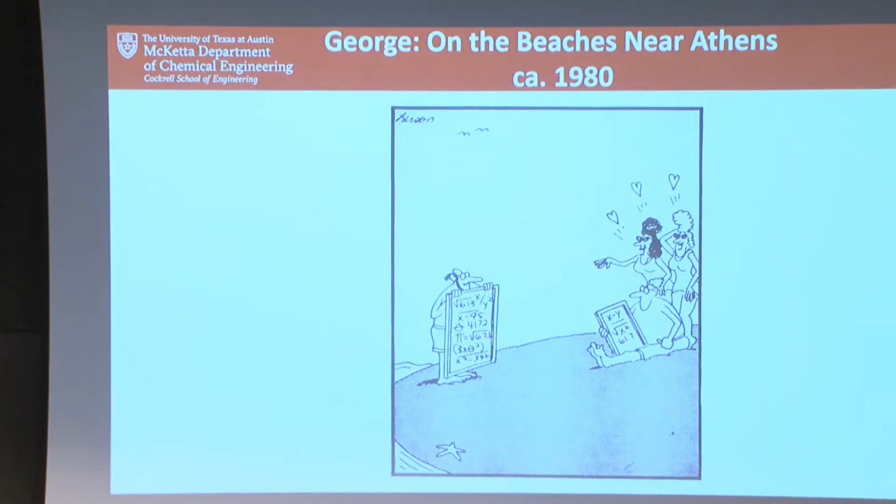We had a good time, and I think this first slide reflects a little bit about George's situation at that time — this is George out on the beaches near Athens. You heard the story from Manfred yesterday about him being very good at having women interested in him. This was George's first attempt, before he met Eleni, at trying to get to know women in Athens. And of course, he had the higher mathematics working in his favor at that point.

We heard some discussion about the process control book George worked on while in Athens. Being now in a kind of competitor position in terms of process control textbooks — although George did one edition, we're up to four now in our book, with Seborg, Mellichamp, and Frank Doyle. So we've stayed with it longer.

We actually started in 1981, believe it or not, with a short course in Santa Barbara, which I thought was a good place to have a short course — I think most of you would agree. We developed some notes, and then George's book came out, so we said, okay, maybe we should wait a while, let this one die out, and then bring ours to market. That was a little bit of the thinking back then, and that's how it played out.

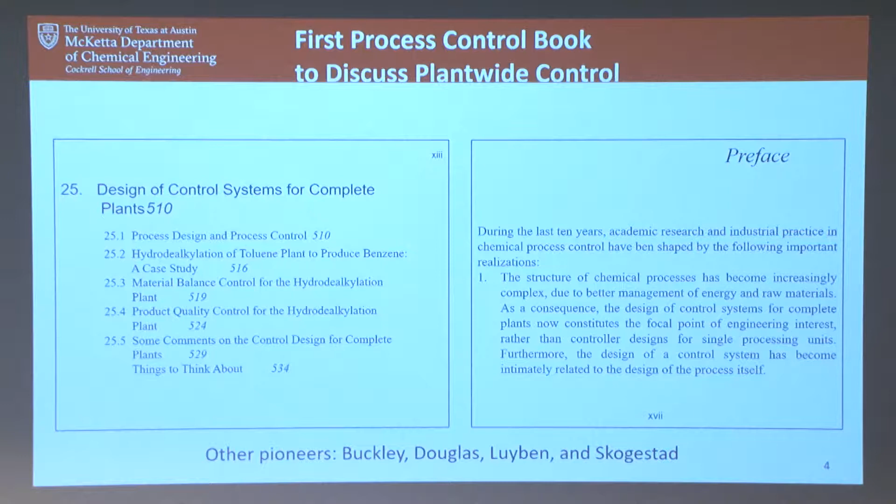What I want to do is recognize George — there was a discussion yesterday about his thinking on plant-wide control. This was the first mainstream process control book to talk about plant-wide control. I've excerpted a couple of pieces here — you can see a key paragraph in the preface that hits the tone of what George was trying to accomplish, very much deep thinking about how we think about plants and their control as opposed to individual unit operations. This is just one of the chapters.

Since that time, and even parallel to it, a number of other people — I've listed their names here — have been pioneers in plant-wide control. But George was certainly among them in terms of getting people to start thinking about this idea. I'm going to come back to that theme later in my talk today to talk about enterprise control.

Here's a slide I actually remembered because I got it from George — I don't know if you remember this slide, but at that time it was handwritten, not your edited version. You gave a talk around 2000 and said, okay, here's the way we need to think about the enterprise of process control. I still have a stash of 35 millimeter slides I used at various talks, and I remember giving a talk around 2000 where I converted your handwritten slide to this one.

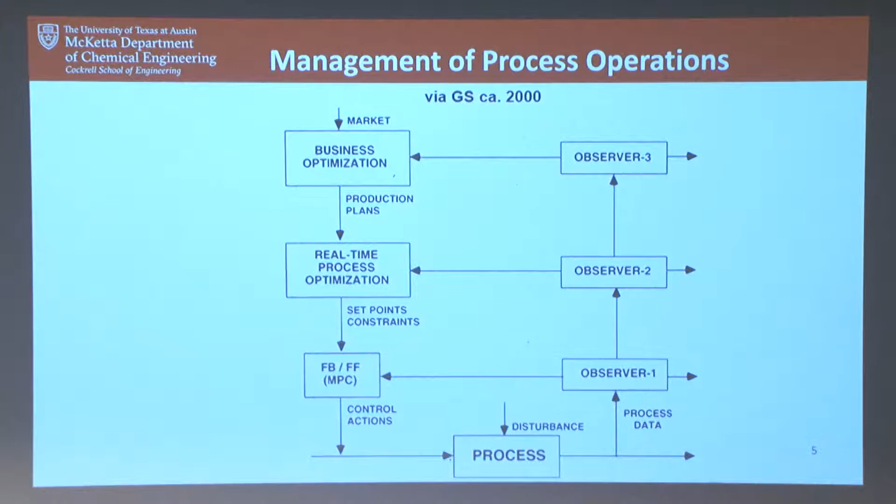But today we've developed our thinking further, and instead of a 3-layer kind of model, this is now a 5-layer model, which most people tend to use to talk about process control, optimization, and supply chain. Many people in this room work at different parts of this, but maybe just 2 of the blocks, or maybe 1.

But the point is that we still like to think about what's happening. And there is, of course, a timescale issue when you look at this slide about things you try to do that are essentially in the same realm of the time constants of the process. And then there are things you can do that are longer range and so on.

This diagram didn't appear in our first or second edition, but in the third edition that came out in 2004. So it's not been around that long, but it's pretty much accepted now. Anyway, this is where we end up thinking about all the different levels of process control.

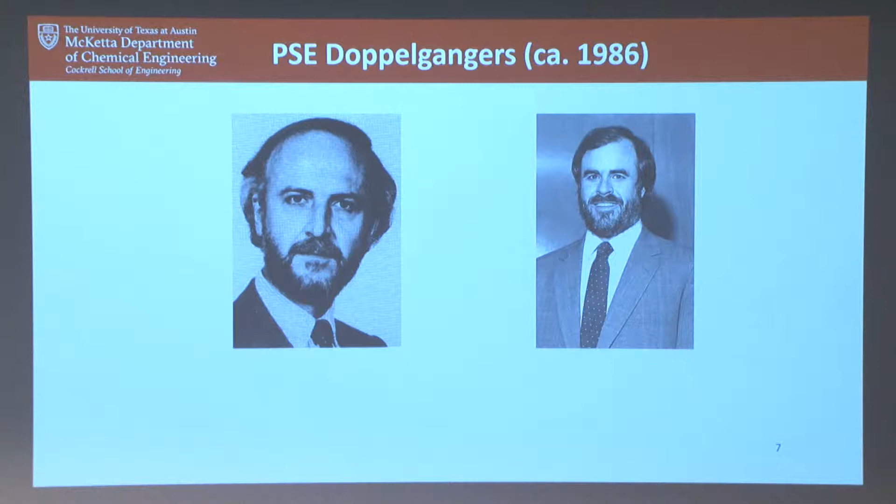And this is what George and I looked like around 1986. So you see there's some similarities, at least in terms of facial hair, if nothing else. And in terms of the hair on the head, we're very similar today too, right? So we all get older, right?

And in fact, I was thinking that, what's the difference between intelligent manufacturing or intelligent systems and smart manufacturing? Is there a difference? Well, probably not. But in any event, the words keep changing, but they seem to mean the same thing.

But certainly, this idea, the multi-layer artificial neural network, that caught fire in the late 70s and in the early 1980s, and people were trying to figure out how do we use this in the process industries, and that led to expert systems.

So we kind of have this going on with artificial intelligence and neural nets, machine learning, et cetera. It's happening today. And in fact, just a few weeks ago, Bill Gates was giving a graduation speech at Columbia, and he said, okay, AI, energy, and biotech are the three big deals coming. And whether we should believe him or not, I think he's probably not too far off on that.

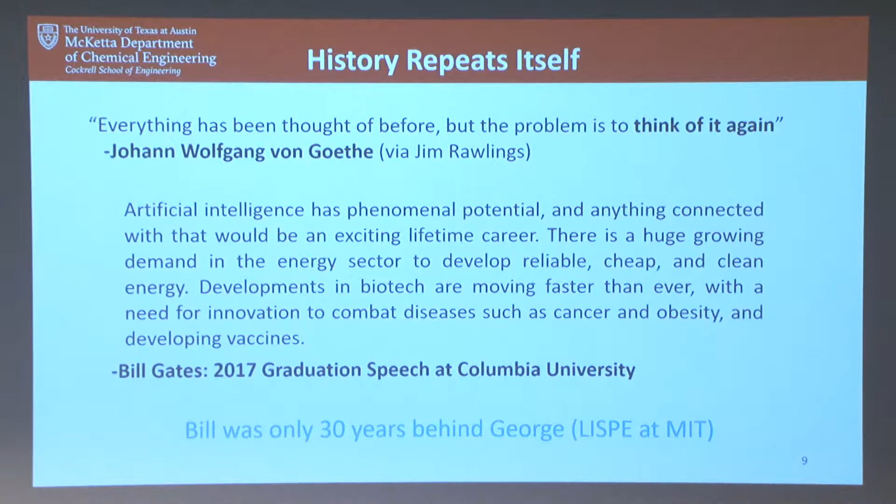So this is very interesting, but of course now we know that Bill was only 30 years behind George, because George was doing the Laboratory for Intelligent Systems back in 1986. So in any event, history does repeat itself, and George is probably getting out of being so active in this area, he's going to watch and see what happens here, I think, but I'm sure you'll be giving us advice on what we should be doing too.

Now, back at that time, there was also a lot of interest in expert systems, and of course, most of the ideas were around essentially the software required to do that. But there was also another school of thought then that really it's not about the software; it's about really having experts. And I'll show you a few of these jokes or cartoons from the CPC meetings that I've had a lot to do with.

So this is the one that came out in 1986 or so, the Shinskey in a box, okay? So does anyone remember who did this cartoon? Because I know who did it. Anyone guess? No. Is Eric here?

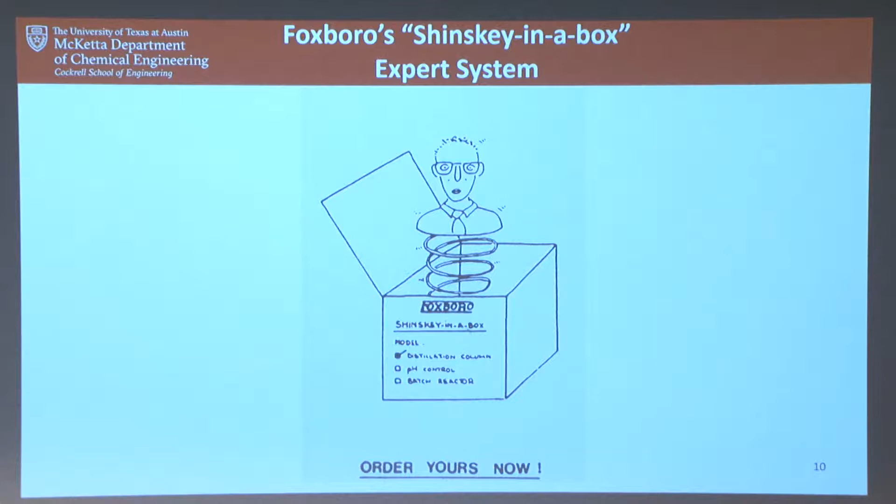And of course, this was also another funny thing that happened in one of the CPC meetings. We had a series of people, of course, people know about dynamic matrix control, or DMC. Later, we had someone give a talk at the next CPC where they got confused. They called it dynamic maintenance control instead of matrix control.

And then in CPC 5, we had someone from Shell who talked about how he got the Pooper Scooper Award. So he said, even a dog can control Shell's Deer Park refinery. So all you need, see, is the operator's there to feed the dog, and the dog is there to keep the operator away from the controls, okay?

That's not my first Trump joke. That's not my only Trump joke.

George has also received a number of awards, and some of them line up fairly well with comments made last night and yesterday. In 1991, George received the Extended Horizon Award at CPC4, for asking the longest question at CPC and sometimes providing long answers as well, but no acceptance speech was permitted.

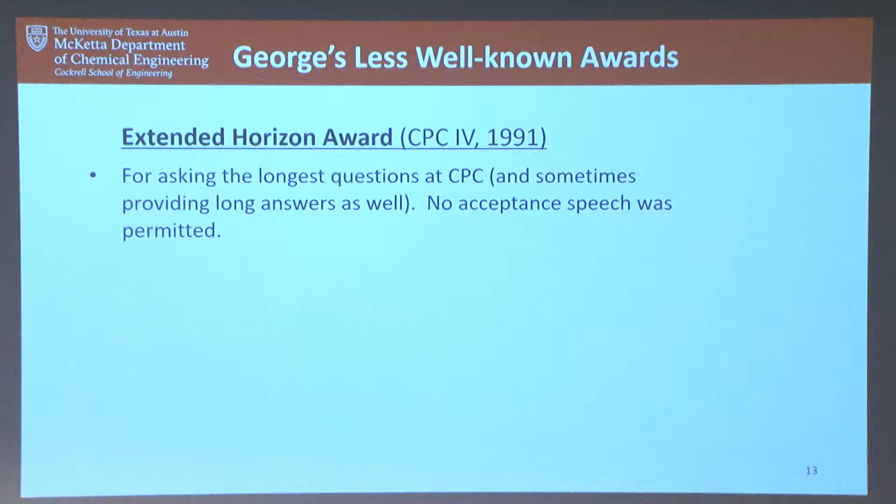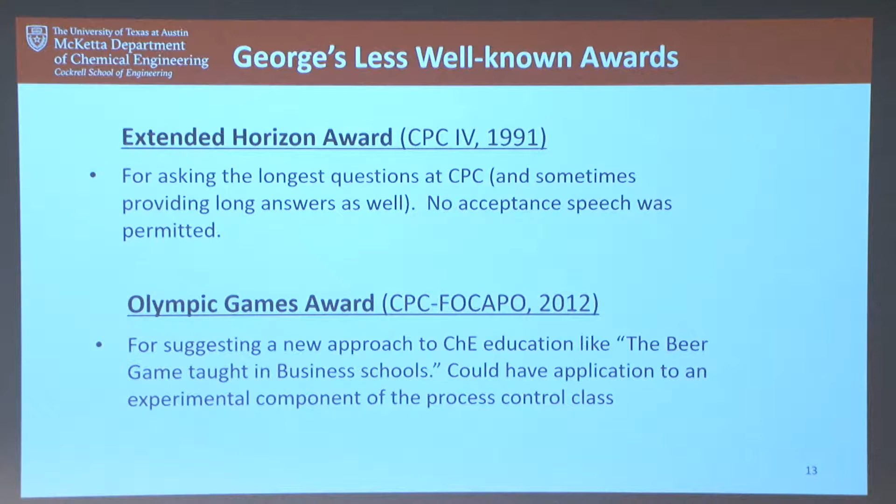That one resonated, obviously. And then more recently in 2012, he gave a nice talk about how we teach process control, and got the Olympic Games Award for suggesting a new approach to chemical engineering education, like the beer game taught in business schools, which he was quite familiar with here at the Sloan School. So those are two less well-known awards George has received.

So now let me transition a little bit into manufacturing more directly. Some of this does fit in because it's part of the things we try to do, such as data analytics. I'm pleased that Jim Davis is here at the meeting today.

Jim worked with George quite a bit on artificial intelligence and expert systems back in the 1980s. Then Jim and I got together probably 10 or 12 years ago when we started trying to address a grand challenge, identified by the National Science Foundation as one of 5 grand challenges about 10 or 12 years ago, which was manufacturing, or smart manufacturing, or intelligent manufacturing.

Of course, the whole thing there is based on data. This is one definition we can use for smart manufacturing: the right data at the right time in the right form, wherever needed. Notice the word enterprise is there. So smart manufacturing is, in a sense, from the very beginning, trying to adopt an enterprise point of view.

Of course, you'll have some talks at this meeting on Internet of Things. My example of why Internet of Things isn't the solution, or at least not the whole solution, is the following.

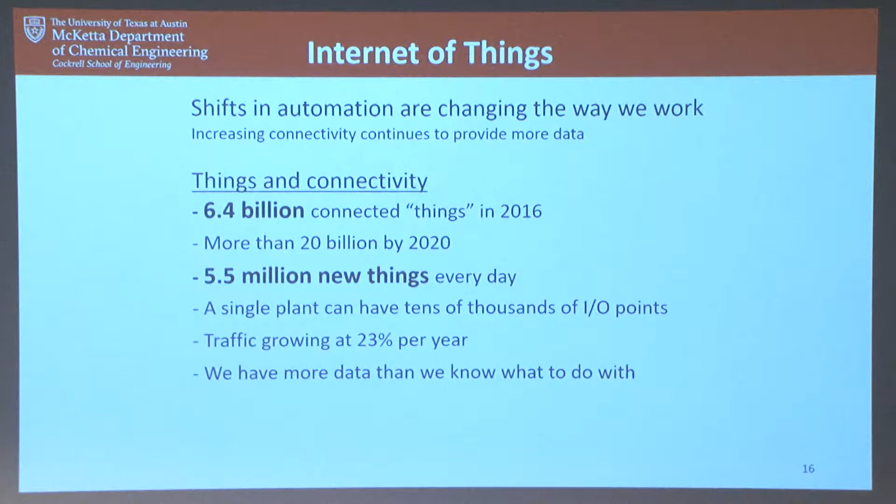The point is this is something that's out there, and it's interesting that as we track graduates in the area of process control, more and more of them are going to work for companies like Microsoft and Amazon, as well as startups and so on. So it's not too far-fetched that process systems control is going to be a unifying feature of all this.

Jim Davis and I actually started an organization about 6 years ago called SMLC, which stands for Smart Manufacturing Leadership Coalition. This is like a vision slide of all the things you'd like to try to accomplish.

Again, nothing here is really brand new to most of you in the audience. But it's looking not only at what's going on inside the factory, but also worrying about the supply chain and the customer side of it. You've got multiple objectives around doing things safely, sustainably, trying to do things in an energy efficient way, reducing emissions, and of course the thing that makes it all work is having access to excellent models, but also strong optimization capabilities.

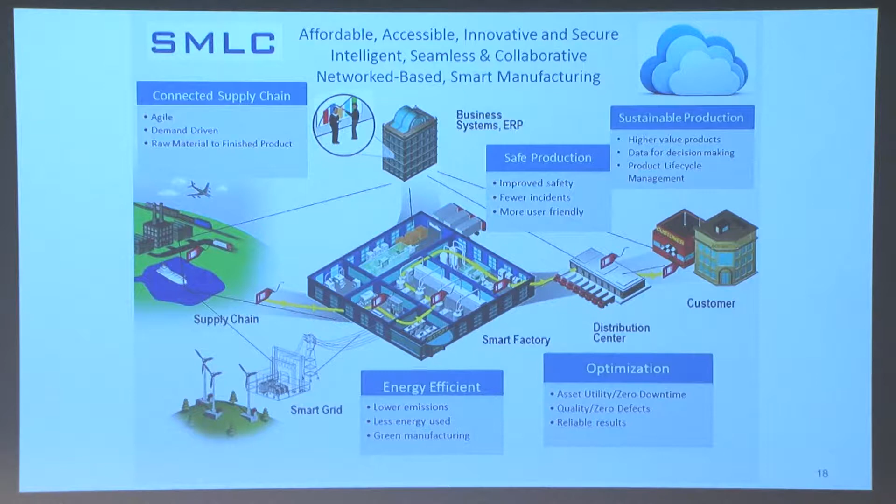I suppose all the work that Jim and I did in getting companies together, universities together, and trying to talk about how do we develop a national agenda around smart manufacturing. There was actually a major project that got funded by DOE that I ended up being the principal investigator for. I'll talk a little about some of the specifics of that in a minute.

The point is that basically provided a launch pad to write a major proposal to the U.S. Department of Energy when they said they wanted to establish a Smart Manufacturing Innovation Institute. And so this is what happened, this thing called CESMII. The CE there stands for Clean Energy, so it's the Clean Energy Smart Manufacturing Innovation Institute. It was announced roughly a little over a year ago, and it was finalized or formalized in January.

Of course, there's still some uncertainty now around what's happening as DOE gets reconfigured under the Trump administration. But the idea is it's a $70 million over 5 years investment by the government, and it's supposed to be matched at least 1-to-1. This is part of the series of manufacturing institutes that have been established across the country, supported by a variety of government agencies.

This was, in fact, the 9th one. There's also another one that's been formed, the 10th one, that also has a lot of interest for chemical engineers. It's called RAPID, that AIChE is leading, that has just also launched this year on process intensification. Some of you are also, I know, aware of that one as well.

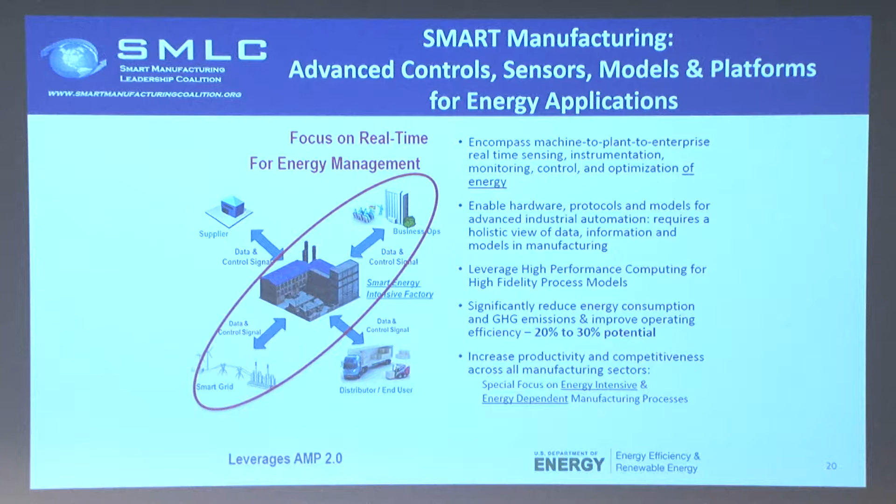So when you look at the stock DOE slide, when they were going around saying this is something they wanted to do, it's interesting that, first of all, I think Jim and I figured out that they read a lot of the literature we wrote, so they basically were able to transport that into a nice slide that talked about why you'd want to do all this. But the point is that if you read the different bullets here, you see process systems engineering embedded in everything here, and it's around sensors, modeling, control, optimization.

But this, again, is specifically addressing energy. The good news is that DOE, I think, also takes the attitude that it's not only energy but also quality. You've got to worry about the trade-off between those things, because if you operate a plant just to save energy, you can have poor quality products, and that doesn't end up becoming a viable business.

So let me talk about a couple of test beds that I worked on, along with Jim Davis and Michael Baldea, who's also a professor at University of Texas. We looked at actually 2 industrial scale plants during the past 4 years as a way of demonstrating the value of smart manufacturing. This is not intended to say, oh, you guys haven't heard of this idea before - certainly the ideas are well known to people in this room - but at the same time, applying it on a really large scale gets industry interested.

So we actually picked one process. Some of you know Larry Megan from Praxair. He arranged to basically run a large test on a steam methane reformer in Port Arthur, Texas. You can see the diagram here of what it looks like - it's basically a facility, if you've never seen one, about the size of this building. So it's a good sized facility.

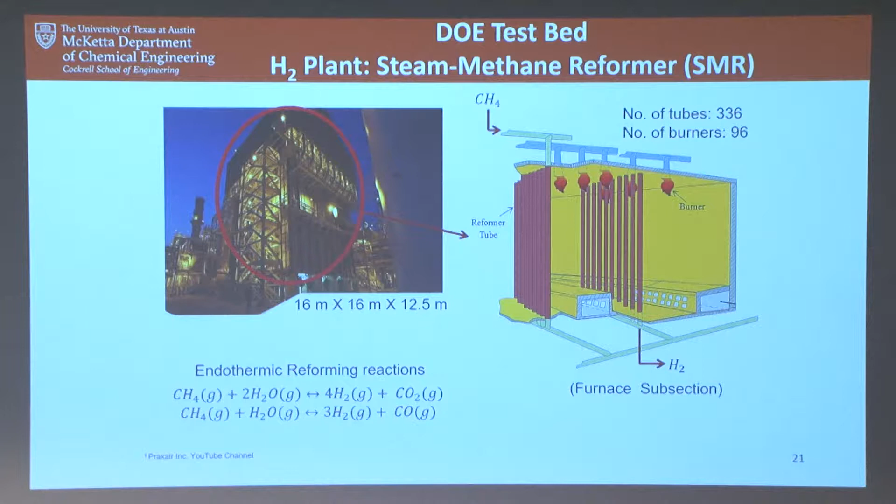The idea is that you've got catalyst tubes. You're heating up, essentially burning natural gas, in order to provide heat to drive an endothermic reaction so you can make hydrogen. In this case, you can see 336 tubes in this particular SMR, and they have burners that are, in the sense of the manipulated variables you have at your command, so you can vary the amount of natural gas going in order to essentially affect the heat transfer properties within the furnace. The idea, of course, is that you'd like to have every tube operate the same and produce the same molecules coming out, achieving maximum efficiency that way.

You do have to worry about the maximum temperature, because if you essentially have too many tubes that get to the maximum temperature, they're going to burn out, and then you have to shut down the unit and replace the tubes. So you'd like to be as near to the constraint as you can be, but then also narrow that distribution. That's, again, the goal of trying to balance the furnace.

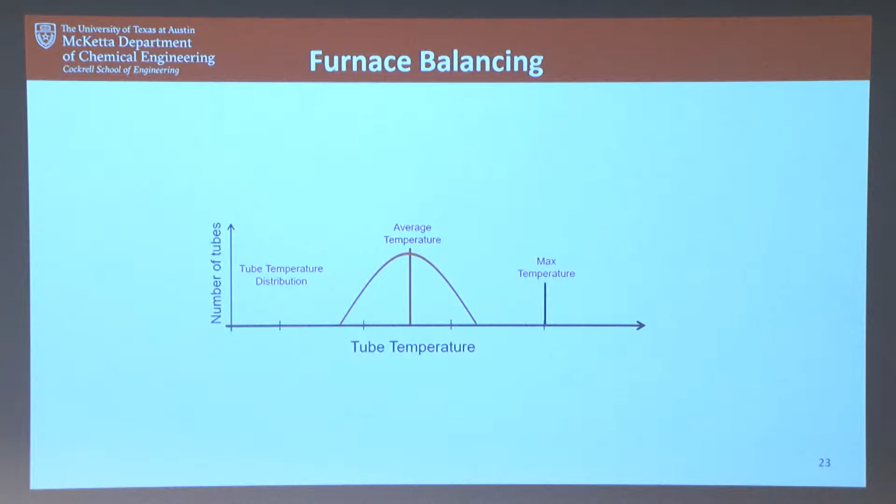You can see we can narrow the distribution, and then we can shift it over. That gives us a higher conversion of methane, and then lower energy consumption in terms of making hydrogen. So we've been able to demonstrate that we can reduce the amount of waste heat by about 25% in this unit, which was already fairly high efficiency, by the way, but you can still do some things in order to make it operate better.

It's interesting that a complex system like this really comes with no control valves. They just basically run it, and they go around and manually adjust things, but there's no automatic control.

So we have really collected a lot of information about temperatures. In fact, you can see that we had cameras mounted on the side of the wall, so you could actually go in and look at the temperature distribution. In fact, you can see, if we're looking at an IR map here of temperatures, it's changing all the time, okay, based on the data precision that we have.

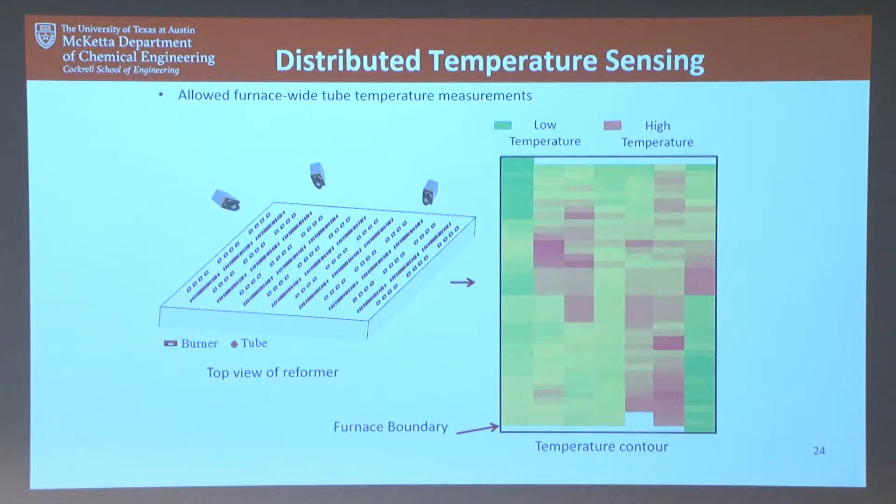And of course, you can go around and adjust the burners accordingly in order to essentially make the furnace operate more efficiently. But it's a big data problem. It's basically acquiring lots of information, and how do you reduce that?

Second example I wanted to briefly mention is metals processing, and this is one where you're essentially using a lot of energy in order to heat up metals, forge them, press them, treat them, and then you end up machining them in order to make a particular kind of shape.

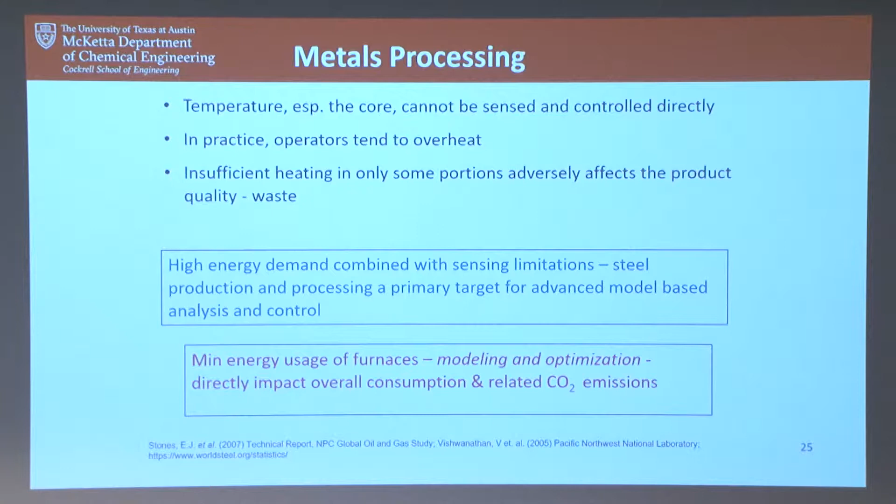And so we have found a second company that was willing to offer up a test bed, which was a company, General Dynamics in Scranton, Pennsylvania, that operates an Army ammunition plant. So they're making pretty good sized shells. You can see some of the pictures here.

Basically, the particular system I want to talk about in a little bit more detail is a heat treatment furnace where they carry out austenitization. You're basically putting these metal billets on a conveyor belt as it gets heated up. And so if you're trying to model this, you've got all the modes of heat transfer you're worried about, as well as essentially moving boundaries, and it's a set of PDEs that you have to solve.

And so it really offers the opportunity to do model-based control and model-based optimization. So here you see again what the final products look like. Those are about 18 inches tall, and you can see again what happens inside the furnace. It's under a nitrogen blanket.

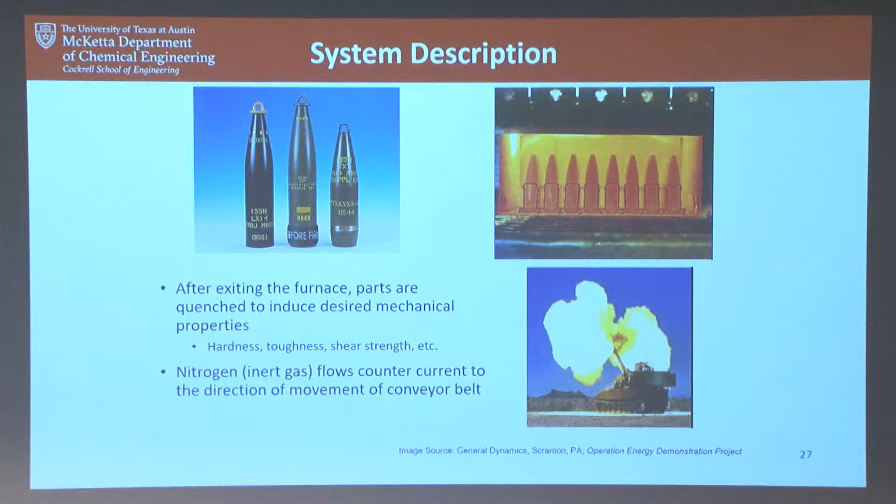The big challenge is, okay, how do I, first of all, operate this furnace at maximum efficiency and save energy? But then you also have to pay attention to the quality issue of, okay, what's the nature of the metal properties after I do the heat treatment, and what does the crystal structure look like, and so on.

Because if the crystal structure basically forms large grains, then you're going to have a lot of defects when you essentially get to the end of the line and do the machining. And in fact, if you look at the cost of energy versus the cost of defects, the cost of defects is definitely a lot larger in this case.

So you basically need to be able to model the materials properties, which unfortunately are not super well known. And you can model, again, what happens as a function of time with a part going through as it gets heated up, what the temperature distribution looks like as it moves through the furnace.

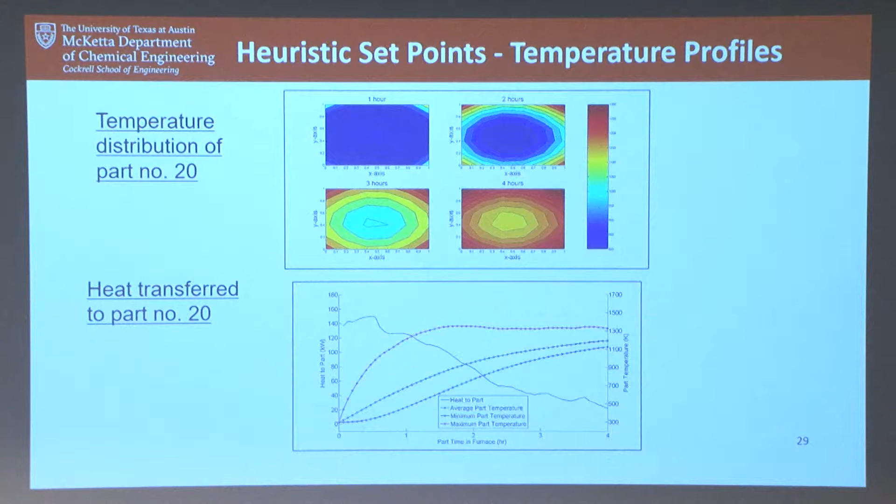I'm not going to talk about the graph in much detail. You can formulate a nonlinear programming problem in order to say, okay, I want to have the right things happening, minimize energy usage, subject to certain constraints on temperature. But then if you look down here about the temperature uniformity, that would be the temperature spread constraint.

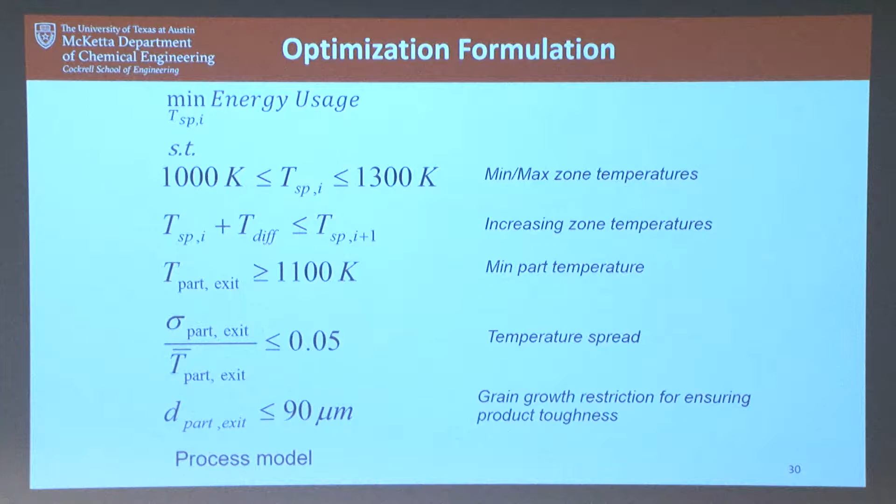And then finally, if you have this embedded in a materials model, you can then essentially put some restrictions on grain growth so that you actually make sure that not only can you save energy, but also make the products that are essentially not going to be thrown away, but are in good shape.

So, a lot of talk around manufacturing and how we bring jobs back. There's really an excellent article I'd suggest people Google, by Atkinson and Ezell, that talks about all the aspects of this—it's a complex question, certainly oversimplified by the administration. But the point is those jobs have gone away, they're not coming back. And if we brought them back, we don't want people in this country making Happy Meal toys and other low cost production items.

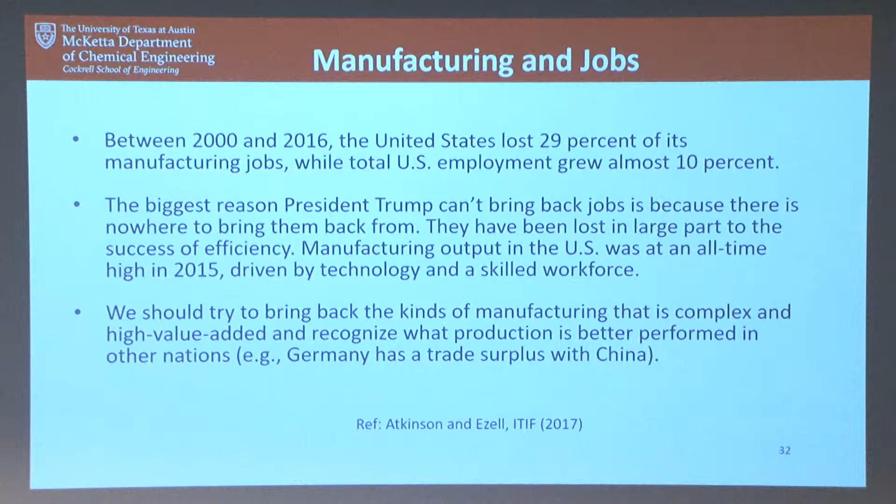This is where I think PSE comes into play. If the U.S. wants to be a leader in manufacturing and increase the job base, we have to identify jobs that are essentially high value added. Some things may be performed better or cheaper in other countries, but we should identify industries that are maturing and require a high level of intelligence to make the products. One example cited is that Germany has a trade surplus with China—so it's not that it can't be done.

Let me talk now about manufacturing and the three components of smart manufacturing. In the context of PSE, it's basically this: factory enterprise integration, exploiting the intelligence of manufacturing, and having disruptive business models.

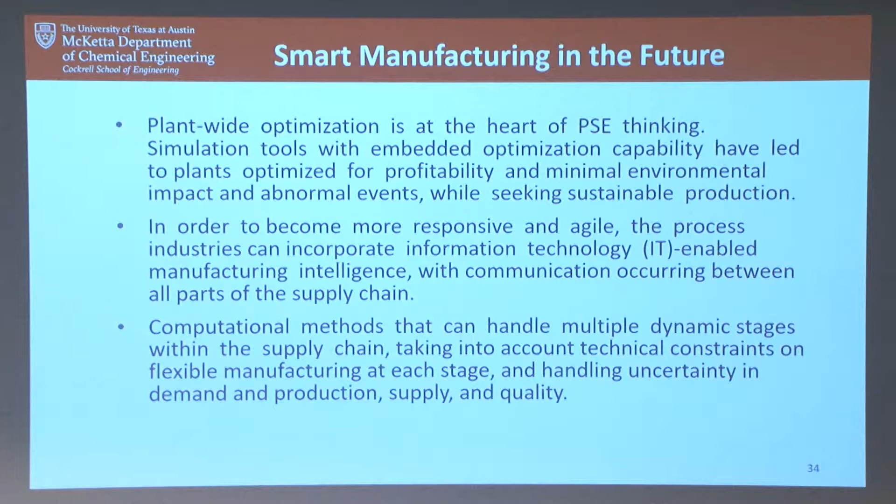As I showed in that diagram of the vision of smart manufacturing, we want to optimize for profitability but have minimal environmental impact and abnormal events. We want the process to become more agile. And finally, we need computational methods that can handle the supply chain and figure out how to do flexible manufacturing while dealing with uncertainty.

So models are really the key element of this. When we're trying to do control, a model helps us figure out what's going to happen down the road in terms of system performance. What's really changing in manufacturing is that we used to make molecules like methanol, ethylene, and things like that. Now we're going to focus more on polymer blends, solvent mixtures, metal composites like I talked about, electrolytes, and so on. That's going to put a lot more burden on the modeling people, and characterizing the whole supply chain from a molecular level is important.

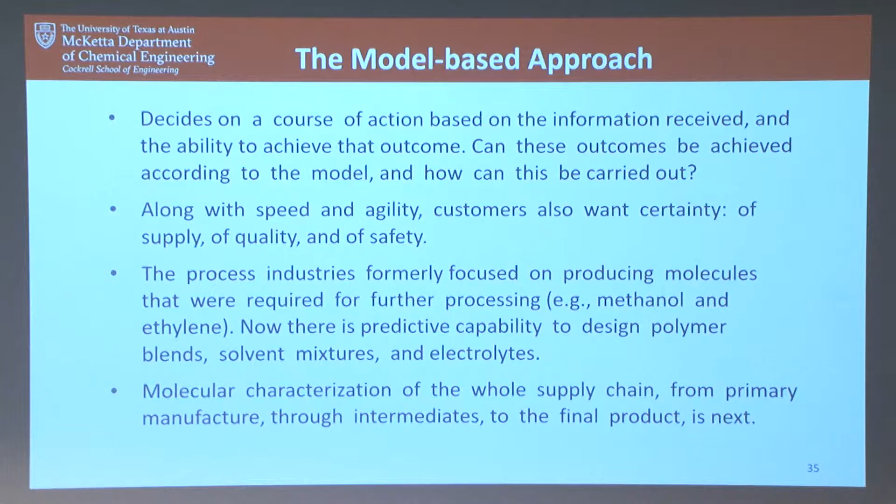So let me wrap up here. We've got to have improved accuracy of models, especially for some of these new kinds of products. I think we're going to see a lot more high-performance computing, but mathematics is still going to be a key element of PSE. The other problem is who's going to take care of the models—where are those people going to come from? It's not something you just hand over without people who know how to take care of them.

In conclusion, I think the smart manufacturing paradigm aligns with PSE, and bringing in PSE and ICT—information and communications technology—is going to help us be more broadly applicable, not only to large enterprises that we know about, but also small and medium ones.

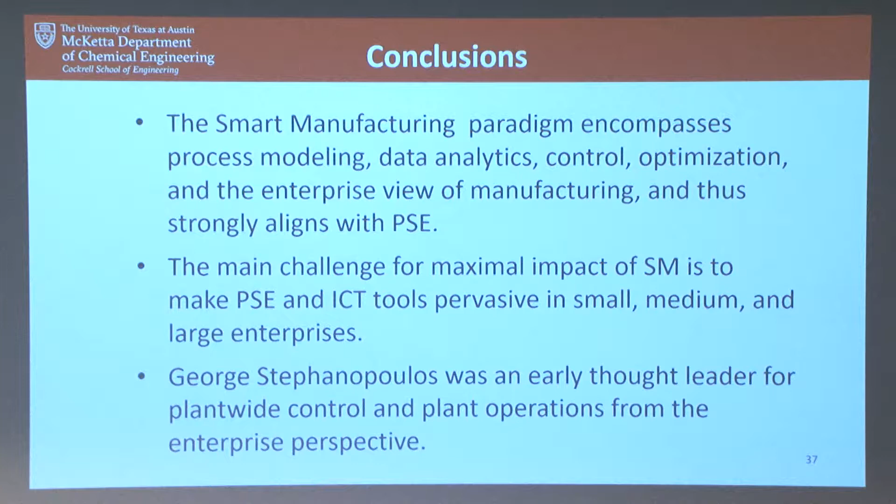There was a conference in Germany last year that I attended, and they had invited three politicians. I was impressed by how much the politicians were informed about technology. One particular thing was that the guy said, you academics, in five years you're not going to be able to do any research without having a data technician or data curator in your group. Where are these people coming from? What degrees do they have? They're obviously not going to be Herr Professor doctors, but somebody has to make a career plan. How do we educate them? Where do we go? I was amazed because I realized it's true.

I was very much amazed because it seems their politicians think about technology and what we need, while here there's not very much discussion about it. You said who is going to take care of the models, who is going to take care of the data. What are these people going to be, and is NSF ever going to fund them?

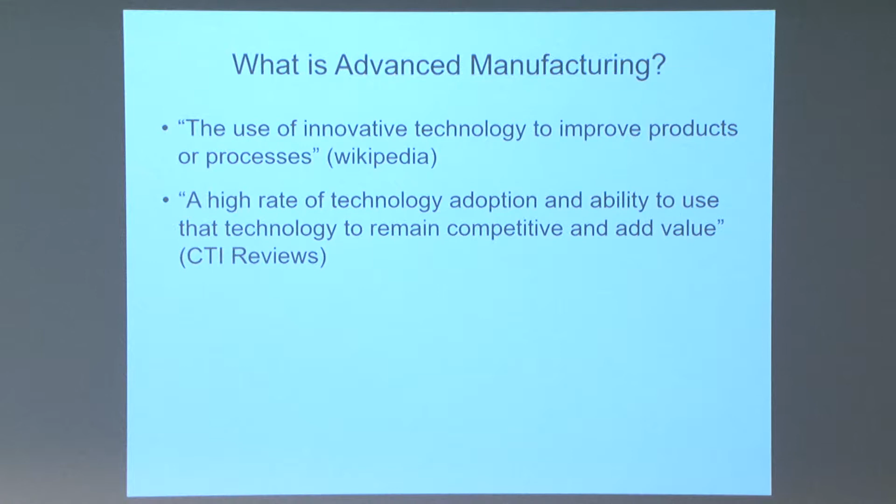So what is it? Here's some definitions - of course, the first place you go for anything is Wikipedia nowadays. The use of innovative technology to improve products and processes, a high rate of technology adoption and ability to use that technology to remain competitive and add value. And then the White House report in 2014: manufacturing that entails rapid transfer of science and technology into manufactured products and processes.

So I think these definitions are fine, but when I use the definition in my own group, I focus more on something that was referred to at the end of Tom's talk - really products in which there's a very high value added in the process. So typically in my group we focus a lot on, let's say, pharmaceuticals and biopharmaceuticals, where you've got carbon, hydrogen, oxygen, maybe a few nitrogen and phosphorus, and then tens or hundreds of millions of dollars come out the other end. So we tend to focus on those sorts of industries, and also where the products are very highly structured - they may have molecular structure, which of course is important, but also crystal structures and microstructure and so forth, which was something also alluded to in a different application in the previous talk.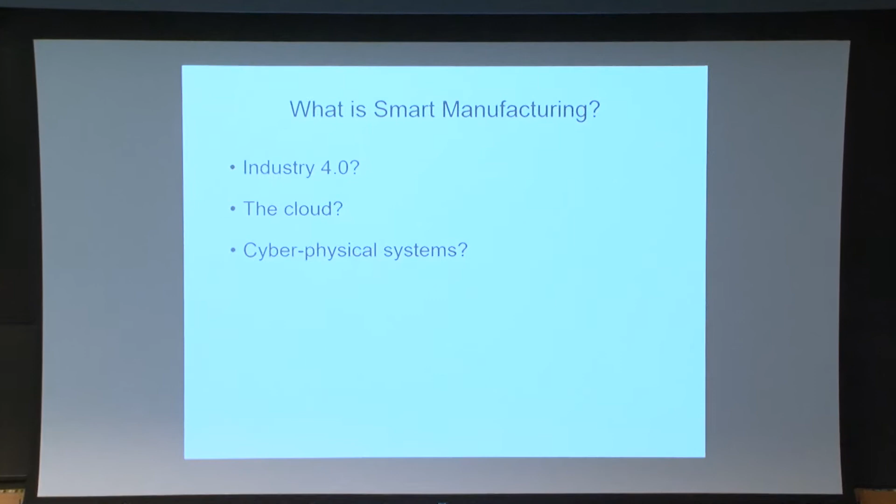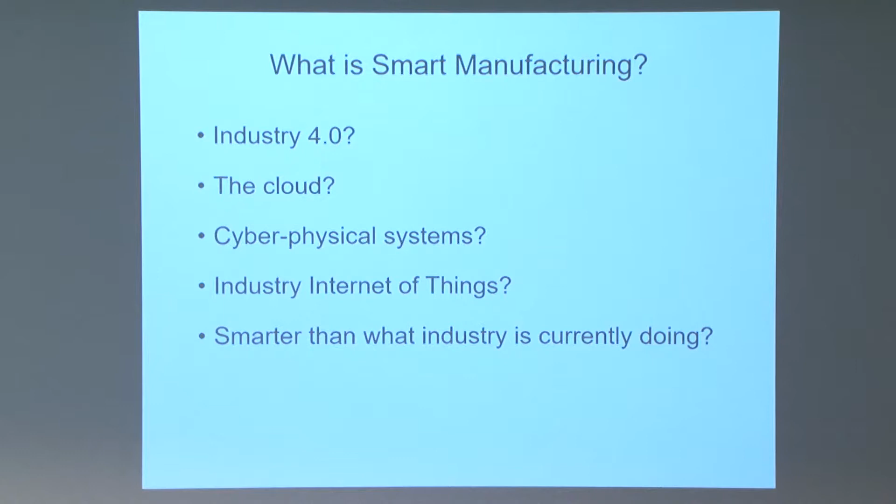Now, the previous talk was about smart manufacturing, so I knew that was probably going to be the topic before, so I'm not going to talk too much about this. But these were terms that were raised yesterday, and so those are all things about smart manufacturing. I like this one, which I heard at SMLC: somebody said smart manufacturing is smarter than what industry is currently doing. So those are the other ones you've all heard before.

So instead, I'm going to focus on a particular vision, at least how I see advanced manufacturing. Part of this is also to address the question that was the last question to Tom about how do you deal with workforce and how do you deal with user skills in terms of operators.

So this is a project, the second DARPA grant that we had. This particular thing here I actually pulled off the DARPA website, so it's all publicly available. DARPA's been funding quite a bit of research in chemical engineering and manufacturing.

This particular one's title happens to come from something that Klaus Jensen came up with here at MIT, which is automated systems for knowledge-based continuous organic synthesis. The text here is an edited version I condensed from the DARPA website that defines the general program that funds our system. What we're building is a fully automated chemical synthesizer that produces, purifies, characterizes, and scales a wide range of organic molecules.

The thing about this is we're trying to build something very similar to when you request things. The idea is you'd have a box, let's say the size of a refrigerator, and you'd walk up to it and say the name of some compound. Maybe you say aliskiren hemifumarate, as an example - that happens to be a drug compound. Then you'd say some catchphrase, so it knows you're not just saying the word in casual conversation. Like 'hook me up' - and then bam, it makes it.

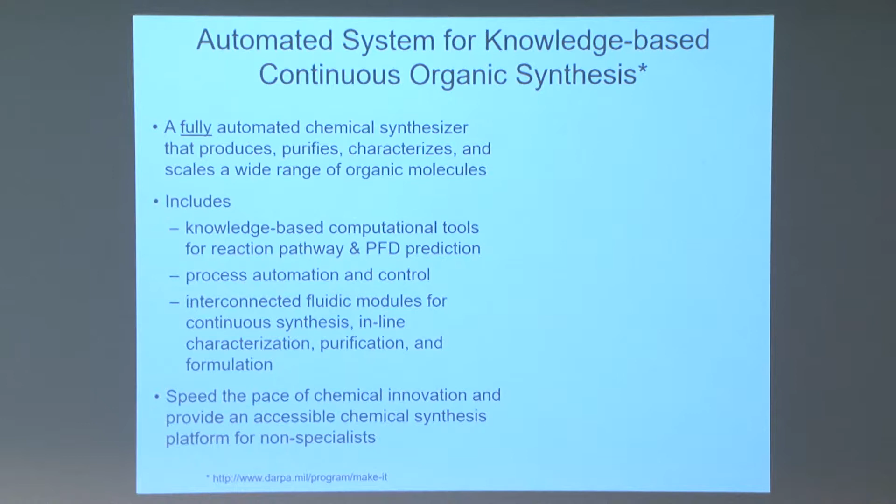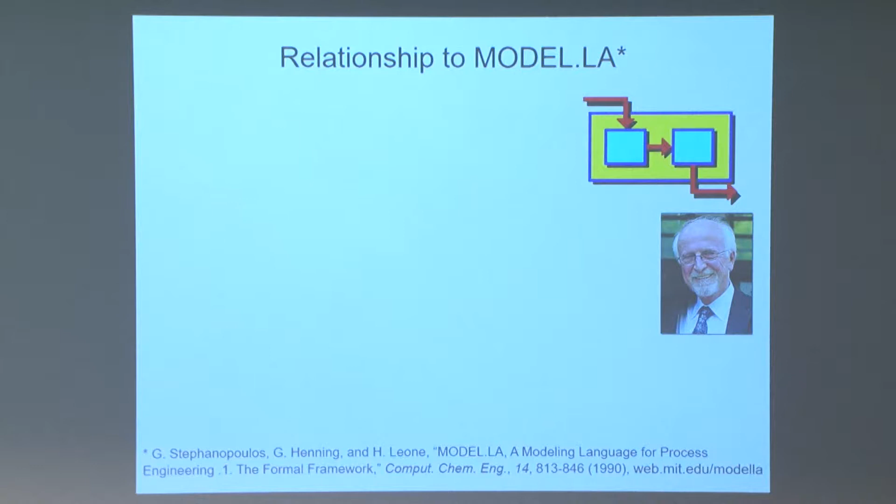So how does this relate to George? Now I'm going to George - I decided not to put George at the beginning, I put him on slide 3, because this integrates pretty well with what this is. Many of us hopefully are familiar with MODEL.LA, but for those who aren't, that's the symbol for MODEL.LA. This was one of the projects from George's lab that was also mentioned briefly yesterday - a computer-aided phenomena-based modeling laboratory that supports synthesis, modeling, and analysis activities in chemical engineering. You can see MODEL.LA is from modeling laboratory.

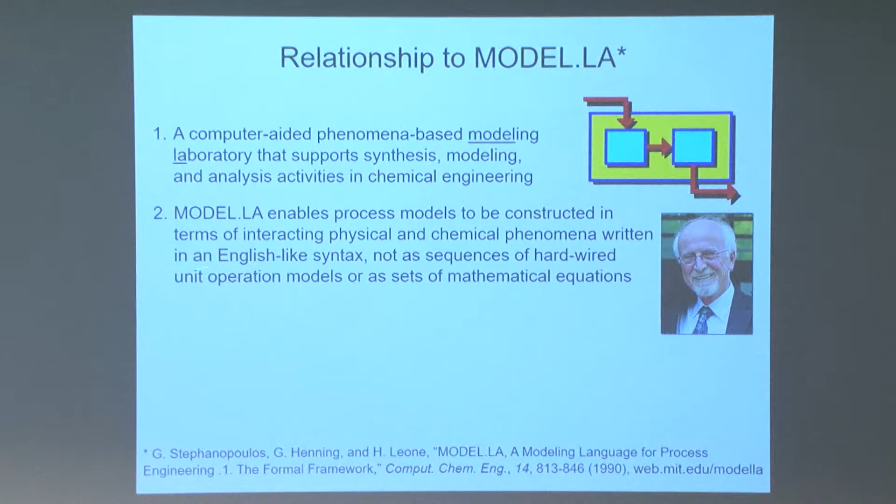MODEL.LA enables process models to be constructed in terms of interacting physical and chemical phenomena, written in English-like syntax, not as sequences of hardwired unit operations or sets of mathematical equations. Based on assumed phenomenon structure, the complete set of equations is derived. This was focused in part on making tools more accessible, and also more efficient.

So what I want to do is compare this to what I just talked about. This is actually the same, right? We're building systems where synthesis, modeling, and analysis are integrated, including uncertainty analysis and optimal control, et cetera. And the second part we're clearly doing too, since we're deriving first principles models for everything.

That's enabled because we're doing small modular units, so the flow patterns are simpler. I agree with that, but that's okay - if you don't like a control problem, you just define a new one by changing the process. So definitely as a team, that's also what we're doing.

And we're constructing all of the equations fully automated. In the system, the plant is put together with the data structures, and it just constructs dynamic simulations in an automated fashion. I'll talk more about that in a few slides. But what's really different is replacing step 2 from MODEL.LA, which is about constructing and interacting with English-like syntax. We're replacing all of this to make it fully automated - automatic construction of process flow diagrams.

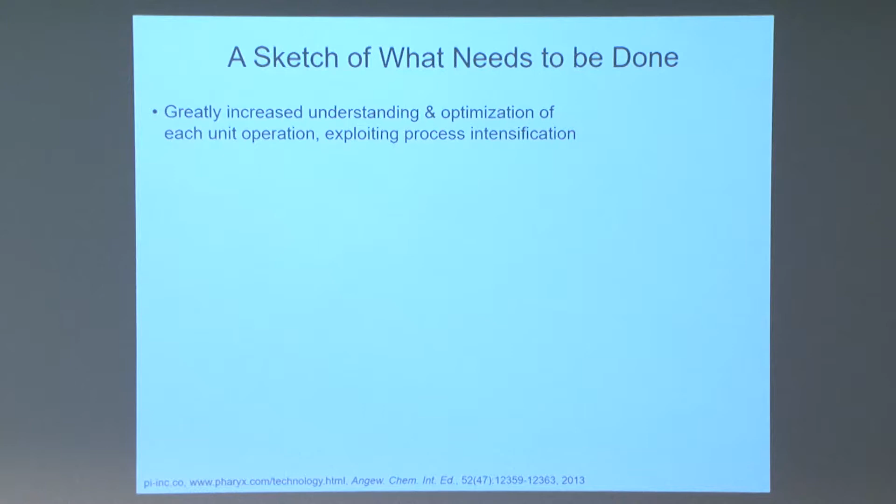First is increased understanding and optimization of each unit operation, exploiting process intensification. We're building and designing very intense processes in the team - high surface area to volume ratios, easy to control, high gains, fast dynamics, small time delays - things that make the control problem a lot easier. Process intensification has many benefits you've probably alluded to yesterday, including cost savings and efficiencies, and it also turns out it makes control problems easy as well.

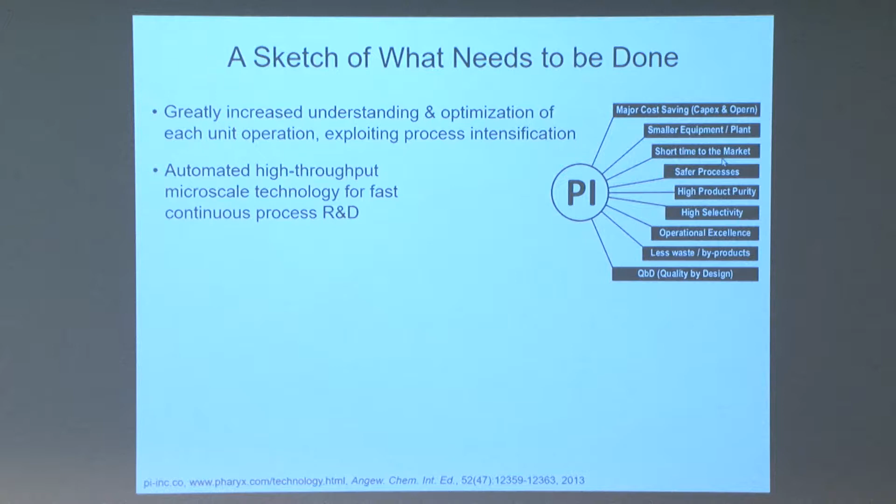So it makes automation of control a lot easier for this kind of system compared to, say, a refinery, where things aren't so intense and you have large time delays, slow time constants, and often low gains. Automated high throughput micro scale to maybe millimeter scale technology enables fast continuous process R&D. Hasebe talked yesterday about the advantage of continuous processing, and continuous is actually good at small scale too in terms of surface area to volume ratios and controllability and operations. I won't talk about that here.

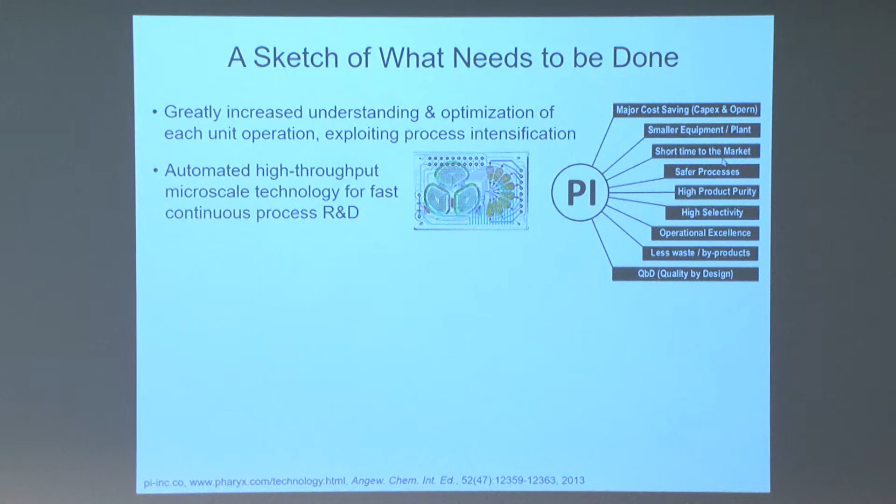This happens to be a picture of one of our collaborators' bioreactors done at micro scale. This system is about the size of a double-sized card deck, but it has very high densities. Plug and play modules - we're designing everything to be plug and play, so you just connect them together. Integrated control and monitoring equipment facilitates deployment, so people can use the modules without any background in control or operation. Again, this is made a lot easier because of doing things at the micro scale. For example, for reactor control, it becomes very easy when you have very high surface area to volume ratio.

You don't need models coming from upstream calculations - you don't even need models to know whether it's exothermic or endothermic. You can just take your whole reactor and put it in an oven, and control the oven at constant temperature. That's easy to do when surface area to volume ratios are very high. And then it's all plug and play, so you just connect the different pieces together with standard connectors - straightforward.

For the user, all the models are dynamic, and we need that because we're building models to do all the startup, shutdown, and transitions also completely automated. And that's really important. It's also important to model the disturbances and uncertainties, because that's the part that actually leads to reductions in control performance.

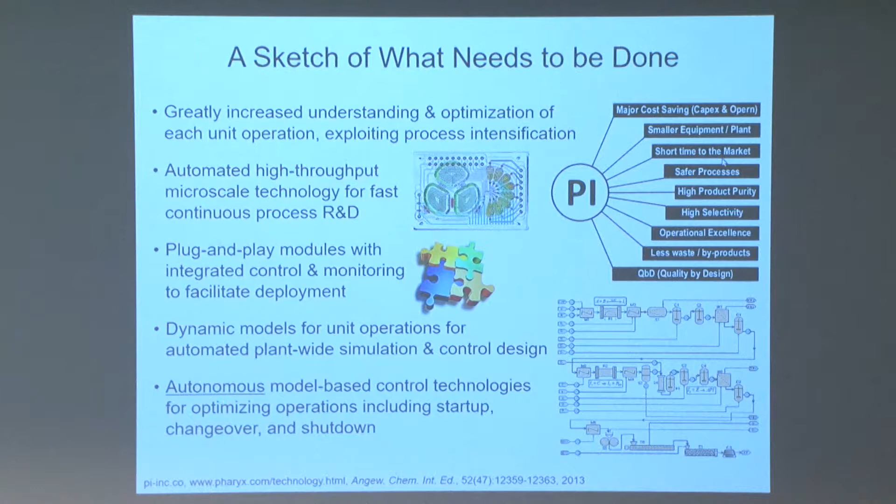That happens to be a previous plant that we built with a bunch of collaborators here at MIT. And then really autonomous. So how do you do autonomous model-based control technologies? This is sort of the components needed to realize a 2040 kind of vision of control.

Now I'm going to say some things that are probably well known to control engineers, but not to all of the audience, so I'll just say it briefly. What we're doing is building a virtual plant, a plant simulation, a dynamic simulation. And that simulation is very, very heavily first principles, essentially all first principles except for calibration of sensors.

And we're doing that because our MPC problems, our control problems, are very different than what you have in the oil industry. So let's take a little sidebar about the oil industry.

Typically you design an MPC controller, you already have all the regulatory controls in place, everything's running, and you're collecting lots of data. Then you do experiments, collect lots of data. Then you build models, typically step response models—actually first you do state space, usually converted to step response, but that's a detail. And then you tune your controller.

But what we're doing in this case is very different, in that we're having the control start from zero. This is a fully automated system. So instead of setting it up with a bunch of operators, we push a button and the full thing's automated.

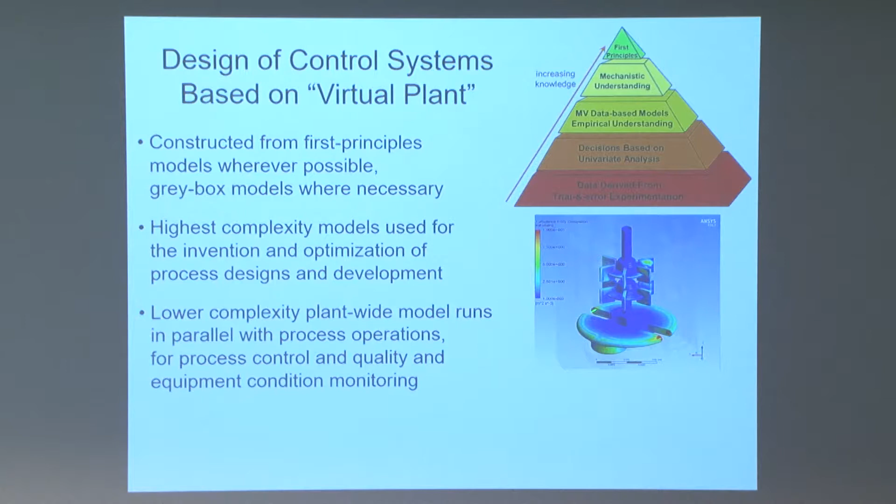That's really our goal here, but that's not the models we actually use when we feed into the control systems. What we do is use lower complexity models. After all this stuff has been designed well, we can use very simple type models—well-mixed tanks, a couple of tanks in series kind of models, for example.

Here's an example of one we use for one of our static mixers for process intensification—it's a standard tank-in-series kind of model. Those are what we need for control and operations, and that's actually the stuff we use when we compose our dynamic simulations for process control and monitoring.

And the goal for all of this is right first time. So the idea is when you start up the process, it's right first time and everything's on spec. Now, what's difficult is that there's a very different situation in pharmaceuticals, or for many high-value products, than what you'd have in the large chemical industry.

So if you have a refinery, let's say you have some gasoline, and the octane is just a little bit below what it should be—do you care? You might lose a little energy, but you put it in a gigantic tank, and if a lot of the other stuff is a little above octane, the overall average is okay, everything's fine.

That's very different when you're looking at high-value type products. High-value products very often have to be everything on spec. So let me give you an example: if you have bad tablets and good tablets and you mix them up, can you sell that? Well, you can't, right?

So actually, if you have one tablet bad anywhere, that entire lot has to go. That could be $10 to $20 million gone, right? Just for having one off-spec product. So you can't, in some sense, mix away your mistakes.

You really have to have everything right. When we design these systems for these automated plants, our focus is not speed to steady state or anything like that. It's actually making the product quality on spec right away so that there's no wasted product. So what else is available and what's needed really from a control perspective?

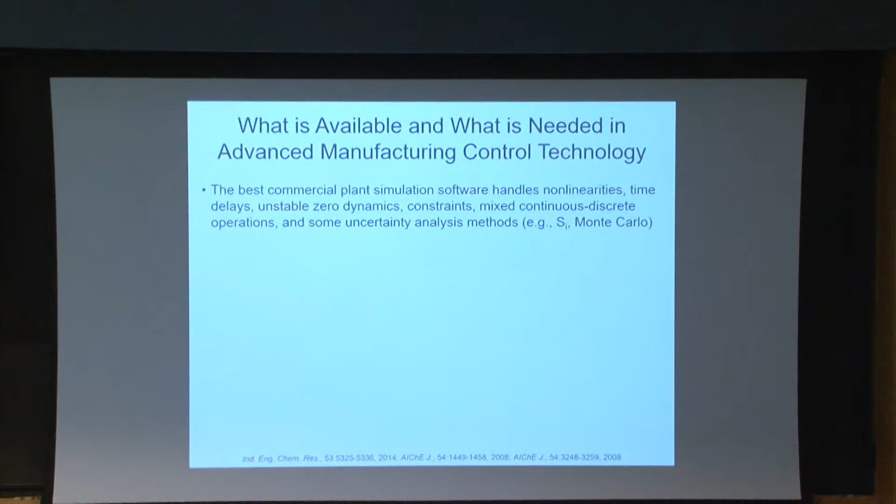One of the things that helps us is plant simulation software, and there was a talk about this just yesterday, talking about gPROMS basically. The best commercial plant simulation software is actually pretty powerful. If you compare the power with the best-in-class methods with what's available in most of industry, it's actually pretty powerful what they've been able to put together.

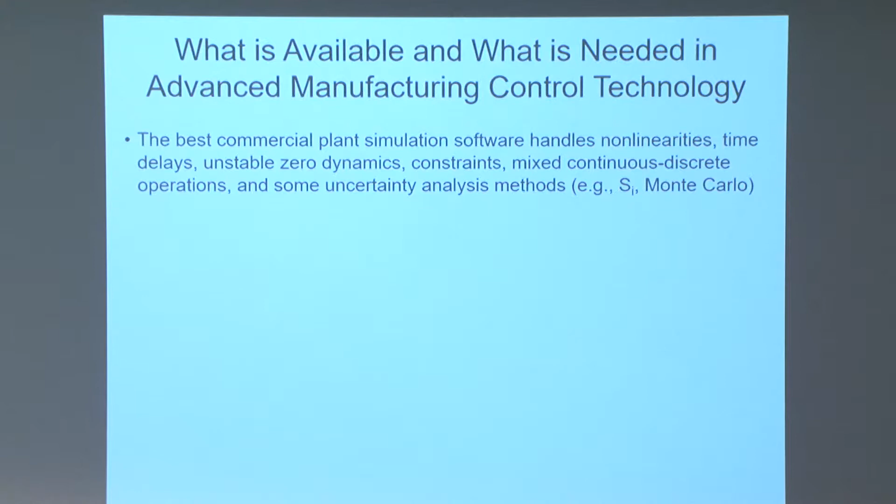You can already handle nonlinearities, time delays, unstable zero dynamics - that's just a technical term meaning non-minimum phase behavior. Constraints, mixed continuous discrete operations, and some uncertainty analysis methods such as sensitivity analysis and Monte Carlo simulations are just built in. That's stuff that's certainly been available, actually available for a while. There's a variety of vendors you can go to that have software with certain pros and cons, but all dynamic simulation with these kind of capabilities.

We tend to use more advanced uncertainty analysis tools usually that can either be integrated into the software, which makes it really fast, or you can have wraparound software. These involve techniques such as polynomial chaos expansions and such. These things can allow you to have much, much faster performance, especially if we're using those for feedback control.

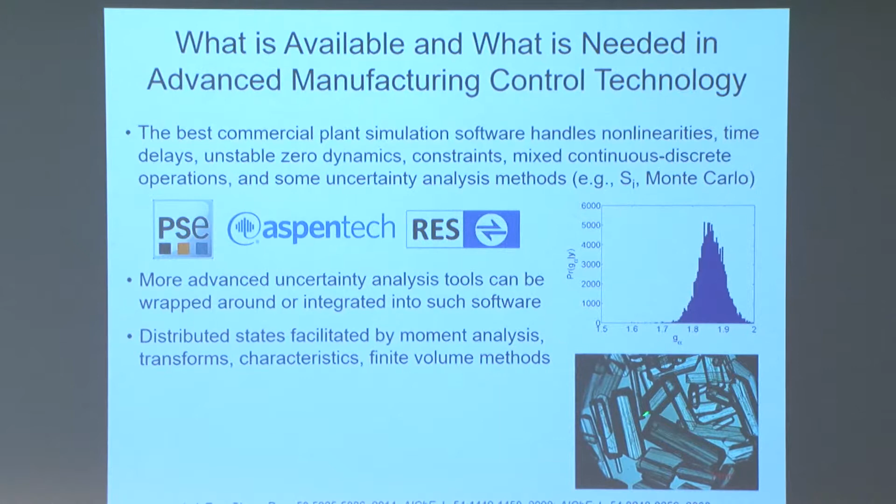But that's okay. The person who's doing this kind of stuff and building the components for the system, the software then moves with that component. So they stay together and they move together. When you can put all the plant together in an automated way, you can use the components without understanding what's actually in the simulation model for each of those modules. That's basically transparent - the user doesn't see that. It just needs one person to know this to build the modules to make that work. This just shows an example from our own lab of distributed states - roughly a two-dimensional distribution, like a two-dimensional size distribution in that case.

More research is really needed in automating the tuning process, so trying to make it so that it's not lots and lots of tuning. We've done a lot of work in that for the last several years, but I think more work needs to be done.

One of the things we've been doing is building it based on realistic uncertainty description you get from system ID that can be constructed automatically, so you can design your MPC controllers where you can just focus on performance.

If you look at the way you implement an MPC controller in practice, you get a step response matrix, and then you might get several of those, and you choose among them, then you go ahead and do a lot of iteration and tuning to try to tune things. But there's no uncertainty quantification, it doesn't show up. So a lot of the stuff you're tuning is just tuning things to deal with stuff that isn't quantified, and you're trading off between different uncertainties and performance. You end up getting a lot of tuning parameters doing it that way.

So in this way, what you do is have the uncertainty come in, and then you just optimize the performance, which is specified by dollars or whatever it is that has value. Then you can get rid of a lot of that tuning. At least that's what the supposition is.

We've worked a lot on reducing online computations. I think more work is still needed, but there are now MPC algorithms that do robust MPC that are almost as fast as, within the same kind of scale and order of magnitude as, nominal MPC algorithms.

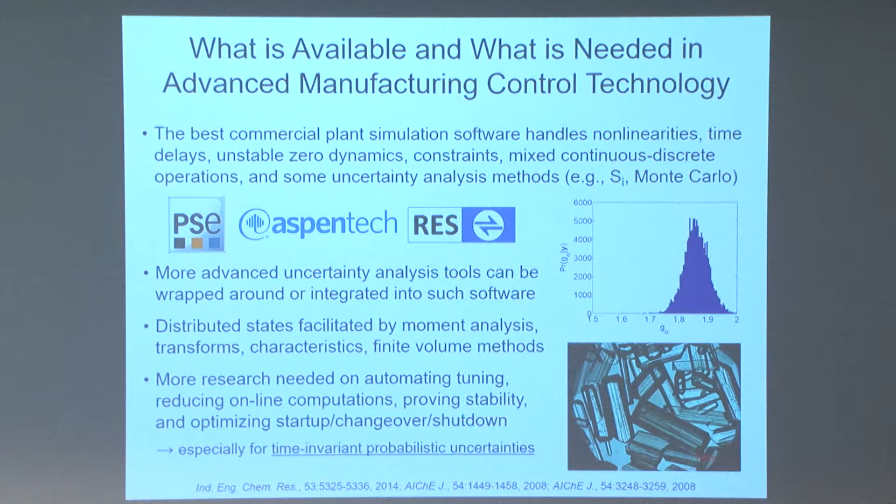What I mentioned before is that I think, or at least what we're doing and hoping, and we see more people doing, is to really do this time-invariant probabilistic uncertainty, or slowly time-varying probabilistic uncertainties, because that's a lot more realistic and information-rich than just doing uncertainty in the traditional way.

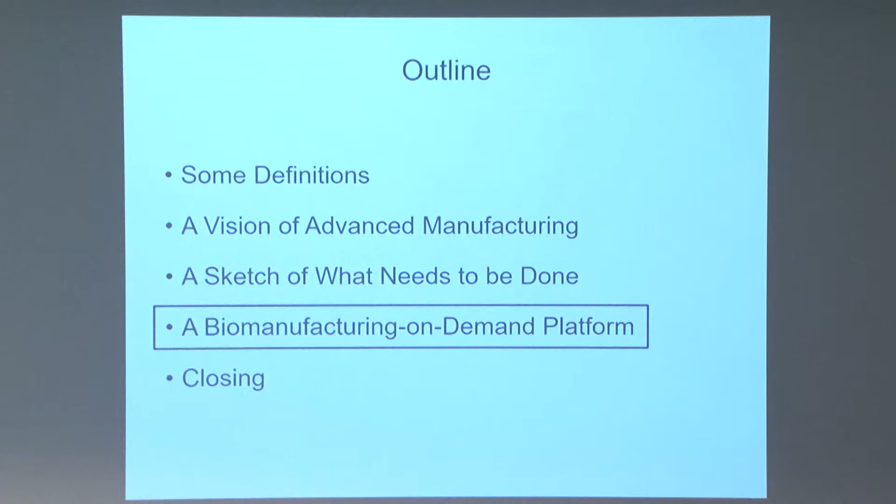So now, I mentioned we've already been doing platforms. We've been actually doing this for more than 5 years. I'm not going to show the first platforms we did, I'm going to show somewhere in the middle, so it's not our current state-of-the-art, and it's not our oldest.

This one is for a biopharmaceutical on-demand platform. It's similar to what I showed before, it's a refrigerator roughly, and you go to it and it makes stuff. In this case it makes drugs, and it's all made biologically. But the same system makes multiple drugs, just like the previous system makes multiple organic chemicals in the same system. So it's a multi-product system.

What this has really been driven by, this is another DARPA project, is that there's a lot of talk about personalized medicine, but personalized medicine can't really follow the normal timeline. Personalized medicine is where you take some cells from a patient, and from that you can do some requirements and then design the drug, make some modifications. There's been a lot of literature on this, especially in the biology field.

But to do that, you can't really do it the way drugs are made today. Drugs are mostly made with biopharmaceuticals, typically about 5 months or so from start to end, and that's just too late. So people have to come up with things that are a lot faster. Some things are already implemented, like cell therapies and so forth, but you'd like to speed a lot of this up.

You'd also like to speed it up so if you get something like SARS or some major outbreak, you can very rapidly produce medicines for that occasion. That's another reason to be able to produce things rather quickly, or in some sense on demand. So the idea is to have flexible methodologies for very rapidly modifying cells to synthesize multiple products, and develop flexible, portable, modular device platforms for manufacturing multiple biologics with all the nice properties we'd like.

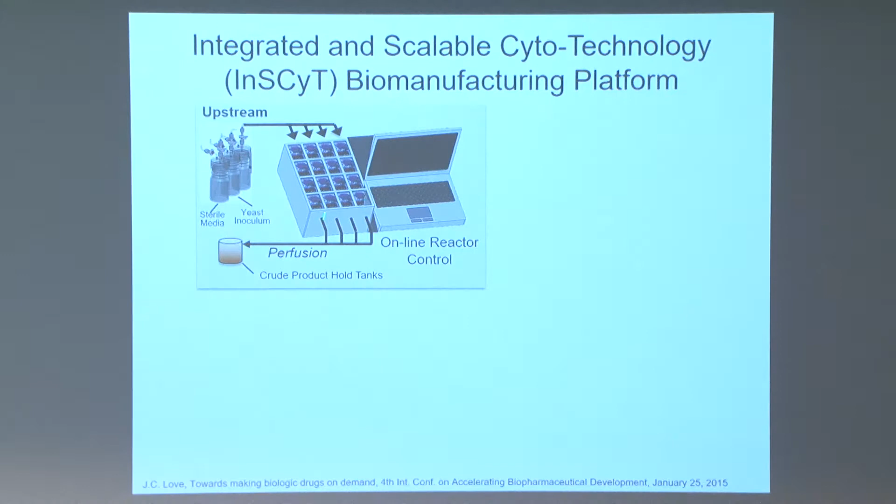This is end-to-end, our second end-to-end process that we did on a small scale type platform. To give some background, here's a high-level view: we've got a bunch of parallel bioreactors that feed into parallel columns, though I'm only showing one. That feeds into some more polishing type separations, and that ends up being the overall schematic of what's going on.

It's probably easiest to just show some pictures. The cell type we're using happens to be yeast, genetically engineered with a collaborator, Chris Love, who's doing all the genetic engineering parts. We're using something very similar to yeast called Pichia pastoris, which can be lyophilized and put in packets.

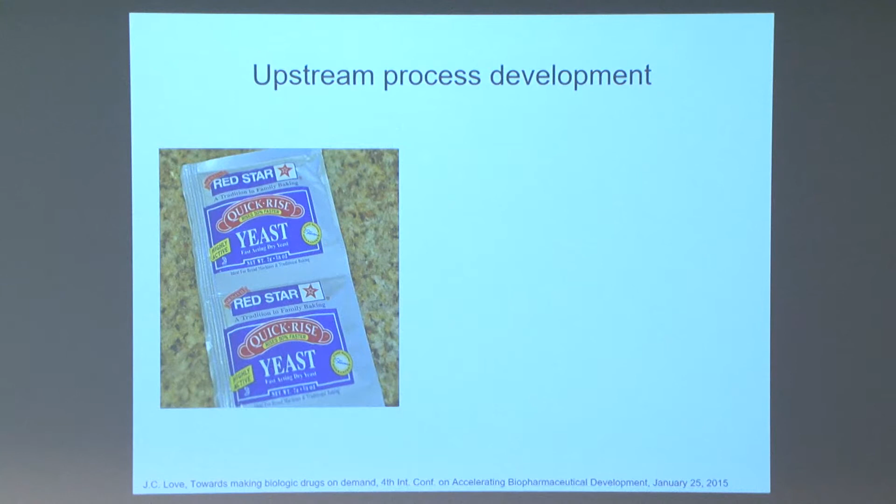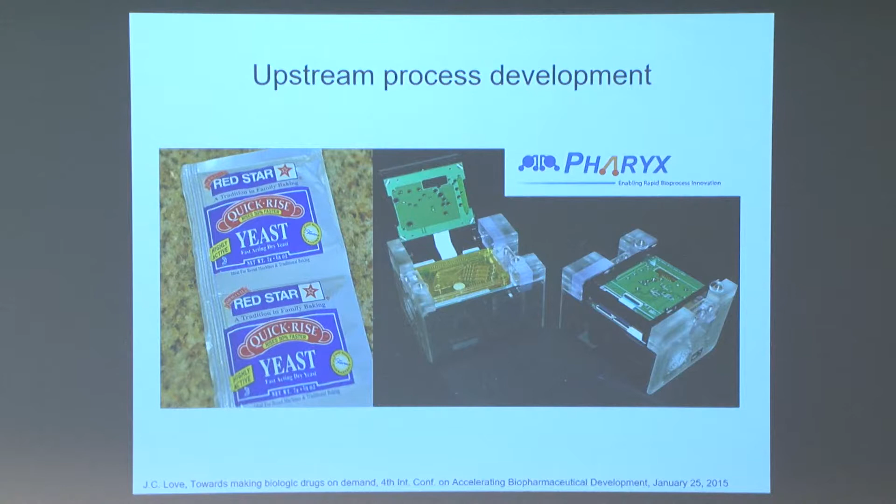This shows the bioreactors we used for generation 1. That was with another collaborator, Rajeev Ram, in electrical engineering. The bioreactor is on top here, with electronics that fit down below, a fully controlled design system with all the different fluids fed into it. Here's another picture showing this popped up, this is the top part, and here is the bioreactor.

These are all little channels or little bioreactors. It basically gets so dense it's like toothpaste, so it's a very highly condensed system. This shows a bunch of them stacked up where you can see the different media and other inputs.

The other things are separations. Separations look more like standard technology, but there have been improvements there as well. So what are we doing there? It's a multi-product plant, continuous and discrete, with all the different characteristics I mentioned, but we need to have no off-spec product.

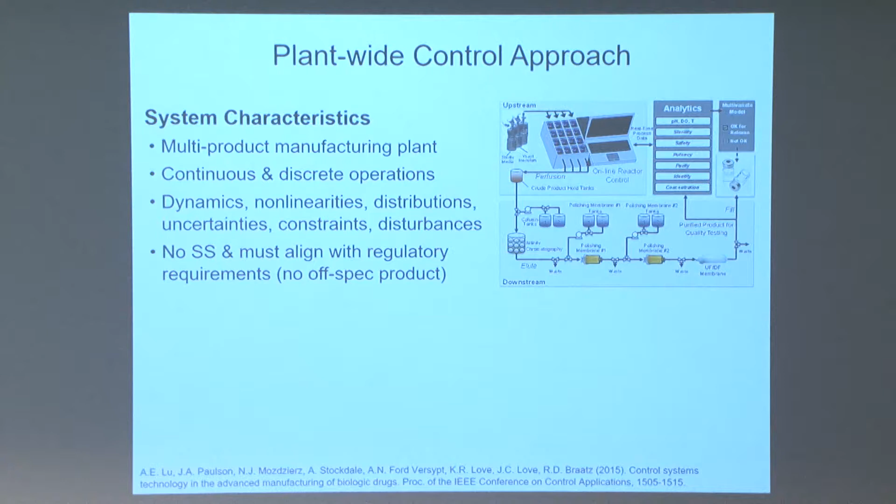The approach we're taking goes back to George again. We needed to automate all the things involving plant-wide control. There was discussion about plant-wide control yesterday as though it's a black box, but we don't find it that much of one. There are very systematic techniques you can codify, described for example in the Stephanopoulos and Ng paper, and we codify those methods involving sensitivity analysis, constructed automatically by dynamic plant simulators.

It's actually not that hard to automate these kinds of systems because they're designed to be high gain with fast dynamics, which makes all the controls a lot easier. It would be harder to automate if you had a bunch of recycles and complicated flow patterns, but that's not what we have here. We employ algorithms that handle all these different properties.

So this is basically what we do. We build first principles, with local control so each module can move around as a whole system. We evaluate performance in simulation, propose design modifications, implement and verify separately. Once we have that as a module, we can compose it into simulations, physically as well as in software, and that's how it's done.

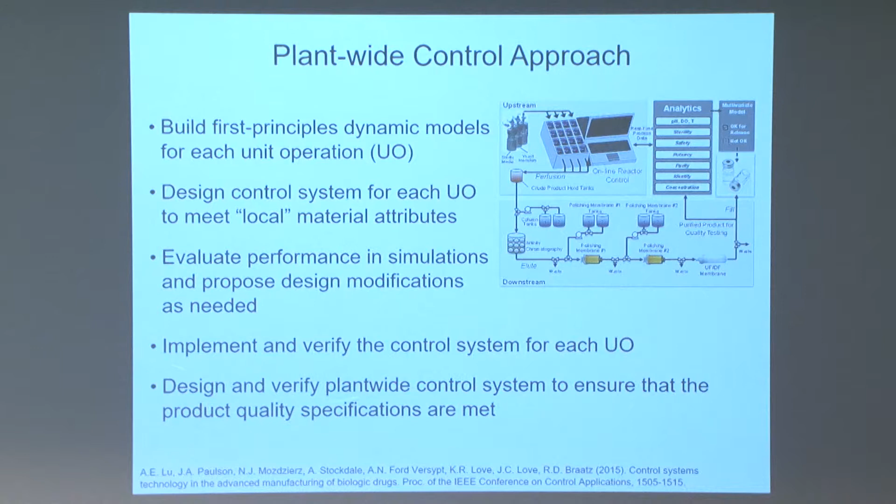These are the two biological drugs from version 1.0 of the system I just showed. We're actually already on version 4.0 now; it just got delivered and we're doing testing for it. It keeps getting more and more advanced. These just happened to be two examples.

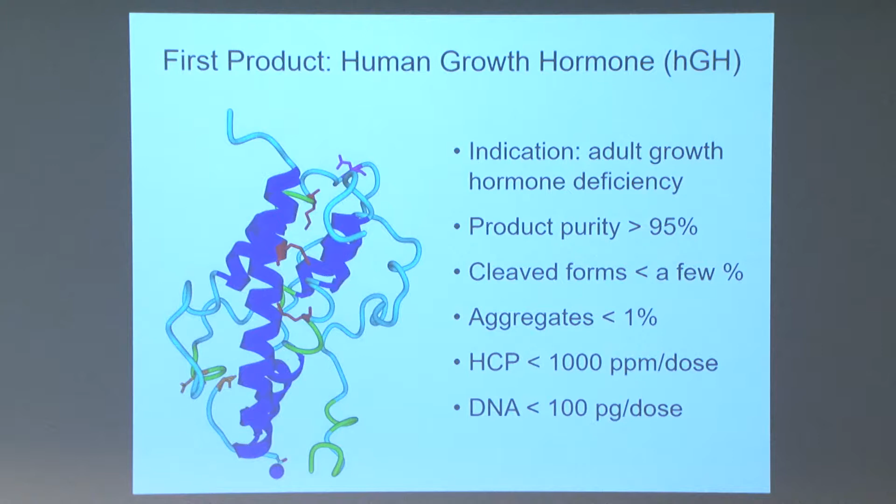This happens to be a high dose type compound, and we met all the purity specifications for something you could deliver to someone. So it's end-to-end: you seed the bioreactor.

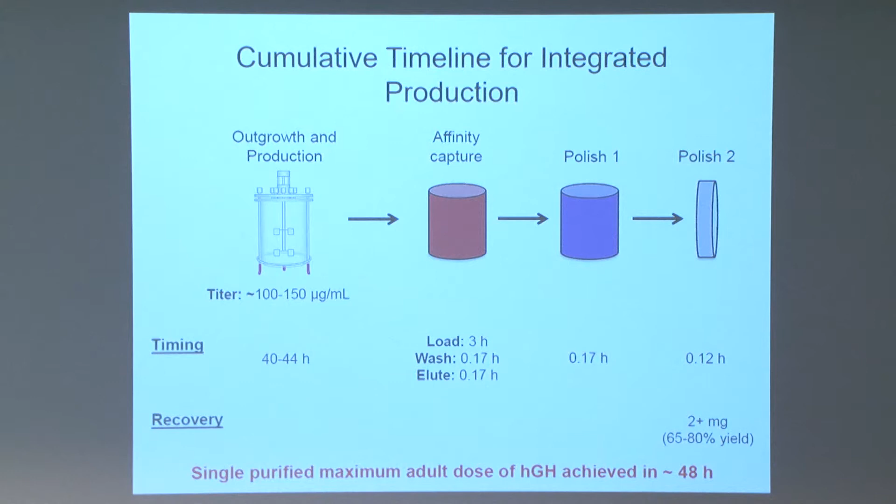That's how fast it is—you can see some of this, like this separation, is only 0.17 hours. So it's very quick: you make things very small, very quick, very agile, so you can basically make biopharmaceuticals on demand. It's fully automated—you just push a button and it fully runs. You walk away and it runs just producing output. It's continuous, so once it starts producing, it just keeps producing. We ran it for about 10 days or so with no errors.

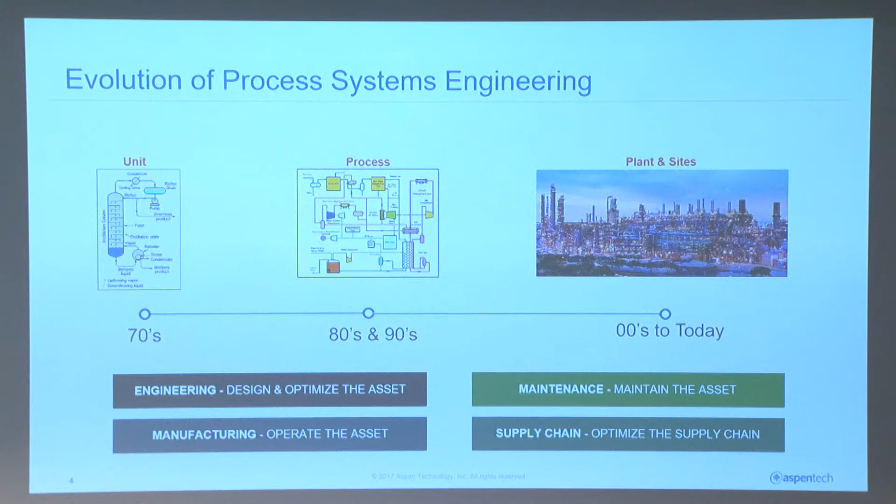At this point in the symposium, I'm probably the 12th person to have given a slide about the evolution of process systems engineering, so I'm not going to spend a lot of time on it. Basically, over the last 40 years, it's not only the scope of what is being modeled in process system engineering, but also the business processes, moving from design to operations to supply chain optimization and to maintenance. So as we've looked at this journey, we ask ourselves, where do we find ourselves today, and what are some of the trends impacting our industry?

I wanted to point out some of the technology trends which have been discussed somewhat. We talk about the Internet of Things, but really it's the industrial Internet of Things which is changing the process world as we see it today. There was a statistic given earlier by Tom Egger about how many Internet-connected devices there will be in 2020 - I think he mentioned 20 billion. Gartner Group talked about 7 billion Internet-connected industrial devices, as opposed to just general Internet-connected devices, by 2020. And many of those will be in the process industries, and we're seeing that today.

Some of the market trends and technology trends we're seeing are that connected industrial devices are going to continue to proliferate worldwide. Sensors and equipment will become increasingly smarter with embeddable software in hardware - smart sensors, things like inferentials and calculations will be done as part of the sensing equipment. Industrial information systems will move more and more to the cloud for a number of reasons: one is just having the bandwidth and computing horsepower, the second is the ease of deployment. Now, when we move these types of systems to the cloud, we need to take into account considerations such as cybersecurity.

And these connected devices will generate massive amounts of conditioned data about our processes and about the manufacturing plants. As more and more of this data becomes available, manufacturers are going to look into how to mine that data for deep insights. So we want to talk in our presentation about the challenges and about some of the vision of being able to exploit that data for what we call asset optimization.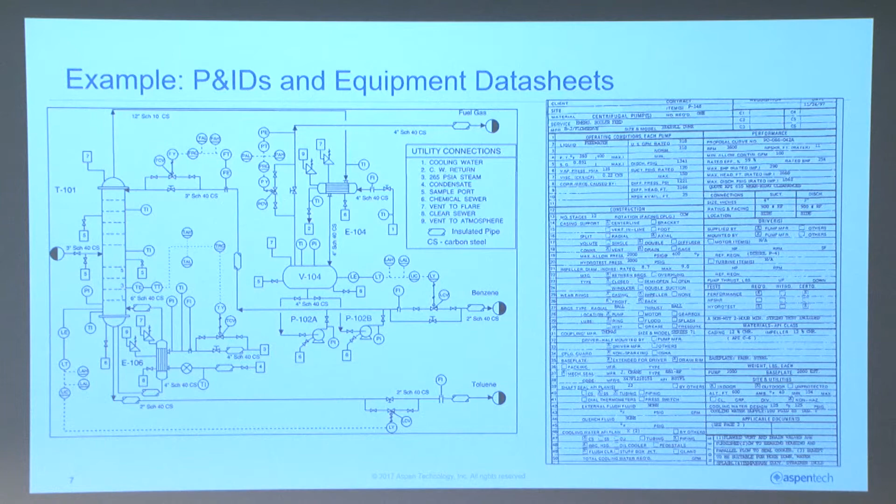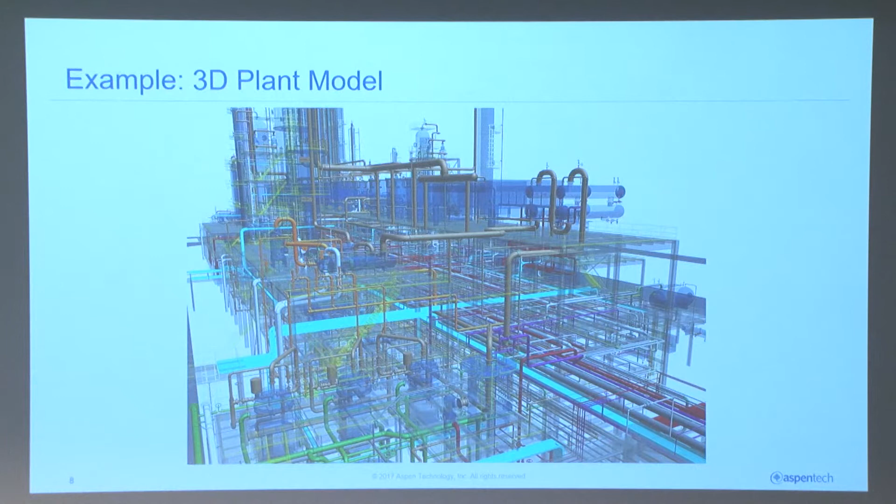In addition to this type of data, another type which is becoming more commonplace is having 3D plant models. Most large capital projects have 3D plant models that are developed now, and this certainly gives you information about the plant layout, about the equipment layout, and it does impose constraints on any optimization.

Another aspect of data that we deal with is in terms of maintenance. Again, earlier somebody asked the question of what happens if something breaks down.

Optimization is something which is going to be impacted by the reliability and availability of your process. This is an example of some maintenance records for a specific refinery unit. If you have rotating equipment or centrifugal equipment, pumps and compressors and such that break down, that surely is going to impact the ability to optimize the process.

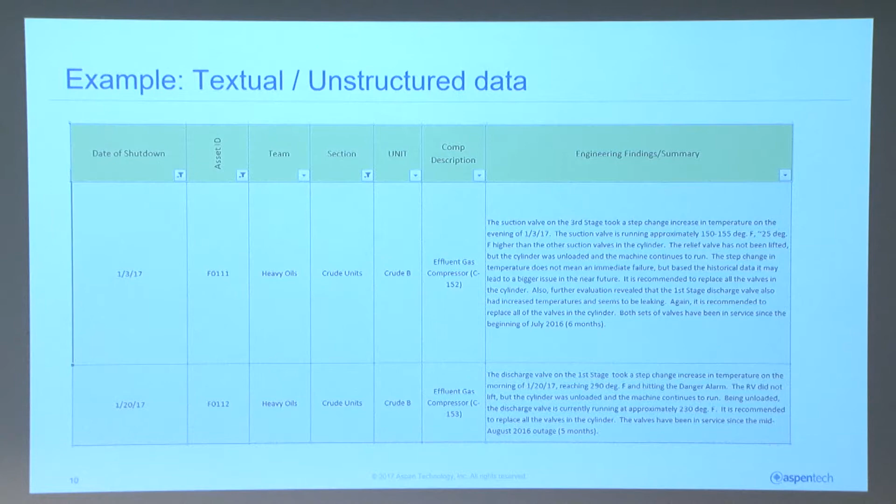And this is the type of data that traditionally maybe has not played as much into the optimization arena. Beyond that sort of structured data, there's unstructured data. There's operator logs and information that will have to be interpreted or could be interpreted and could provide additional insights in terms of the operation of the plant.

So if we're looking at optimizing the plant or optimizing assets, what if you could leverage the rich wealth of asset data in design, operations, and maintenance to push the boundaries of what's possible and optimize the asset across the life cycle of the plant? What if you could leverage asset data to run the plant to the limits of performance and optimize the maintenance and reduce the downtime so that you can get more out of your plant?

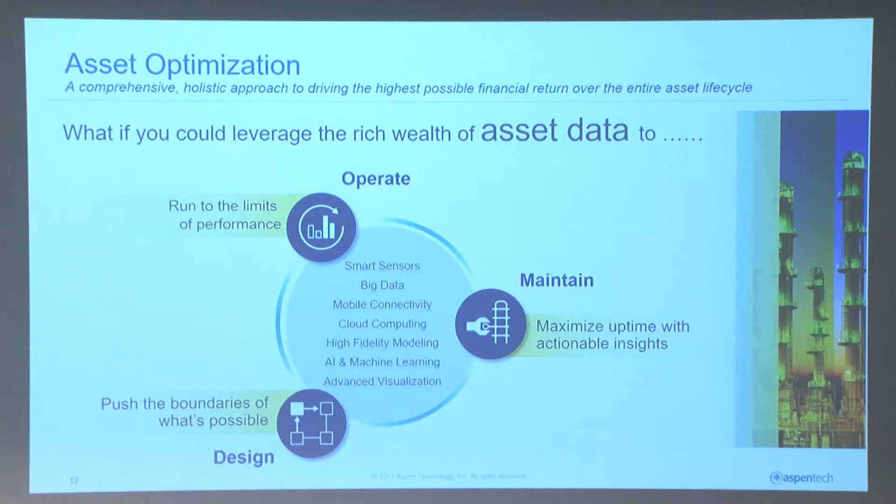So those are the challenges. And looking at some of the technologies that are in play, such as smart sensors, big data, data science, mobile connectivity, cloud computing, modeling, AI, machine learning, some of the things that have been talked about over the last few days. What we'd like to do is to present maybe some ideas based on some of the things that we've been working on, as well as some of the things that our customers have been working on, in terms of how to leverage that data in terms of using it to optimize the asset. So at this point, I'd like to turn it over to my colleague, Ashok.

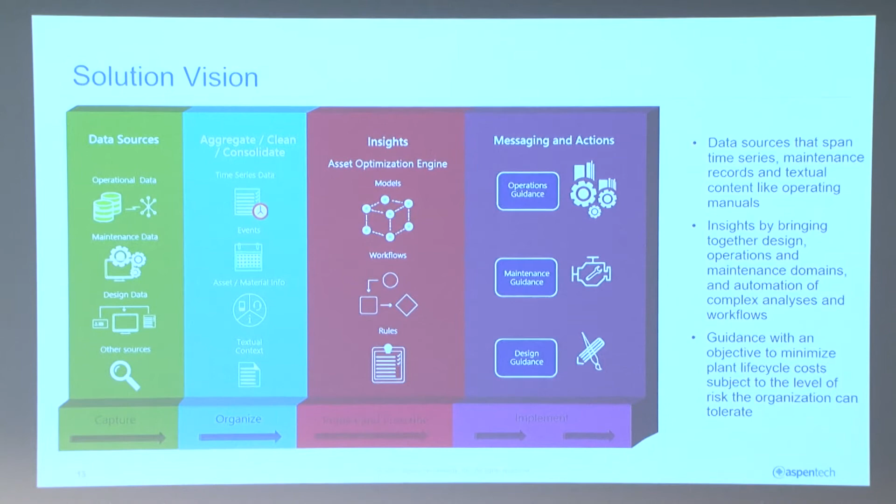What I would like to do is now just present a different view on the same information that Bill just presented. If you look at this slide, for those of you who are familiar with real-time optimization, the steps below are reasonably clear: capturing data, organizing it, predicting and prescribing, ultimately implementing the actions. What's different about this diagram is that now we're not only dealing with continuous information or operational data, time series data. We're dealing with maintenance data, whether it be design data, or it could be other sources as well.

And the other sources are not necessarily structured data, they could be textual data as well. So what we see as our vision is that given this wealth of data sources that span a whole host of possible areas and structures, whether it be structured or unstructured, there are challenges that come in that first you need to pull the data together. And that is the consolidation, aggregation, the cleaning of the data becomes crucial.

Now that the data is in different contexts, how do you pull it together? How do you make sense of the linkage? Once you have data linked and appropriately structured, the next challenge is how do you derive insights from it? And what we see is that we can, by bringing together all the design, operation, and maintenance domains, we can subject it to a whole stack of what we would call an ensemble model.

And our definition of an ensemble model here is a combination of first principle models, empirical models, perhaps machine learning models, statistical models. So all of them play a role. What we've seen is that each of them has its specific niche, and together they prove to be very, very powerful. So given that if we can combine that together with the appropriate workflows and the appropriate rules, then what do we get? What we can provide then is operational, maintenance, as well as design guidance.

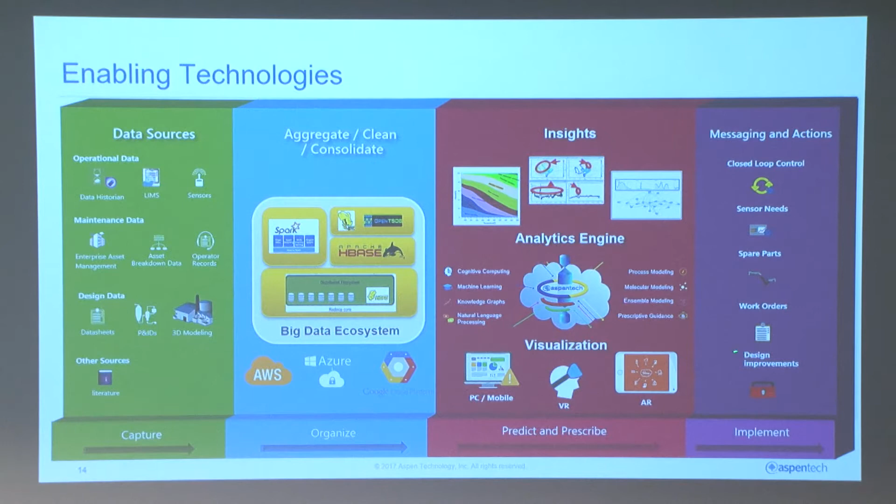What I'd like to do in the next few slides is touch upon a few areas where AspenTech has made some strides, and it might help set the background into the work that still needs to be done. So I'll begin with the area of data science.

As Bill just pointed out, there is a lot of data in the historians, and the data tends to be such that visual observation and trying to determine that this pattern recurred at a previous date in a certain way is difficult. So there have been a number of moves - and again, a lot of these techniques were used in the medical field quite a bit, and now we're trying to incorporate them into the process industries.

Pattern discovery is a capability where all the user needs to provide is the length of a particular pattern and a tag name. With those two pieces of information, the algorithm is able to traverse the historical data set and pull together patterns that recur, and even categorize them into different groups, so you have different patterns that recur at different points in time. How does this help? You'll see in the following slide - this is kind of the foundational building block of root cause analysis that we can perform.

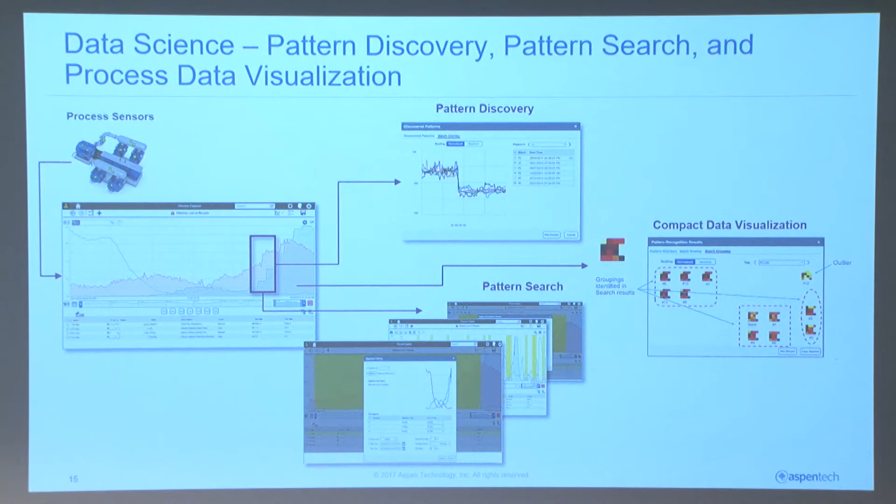It's basically a bitmap, probably a 4x4 or 8x8 bitmap, where the colors are not necessarily representative of actual values. In aggregate, they represent the way a person would distinguish between different time series. So again, more work going on in that field, but this is a powerful area.

The area of root cause analysis, again, a nascent field, very powerful. What I mentioned earlier was pattern discovery, the way to find patterns automatically. The algorithm can do that.

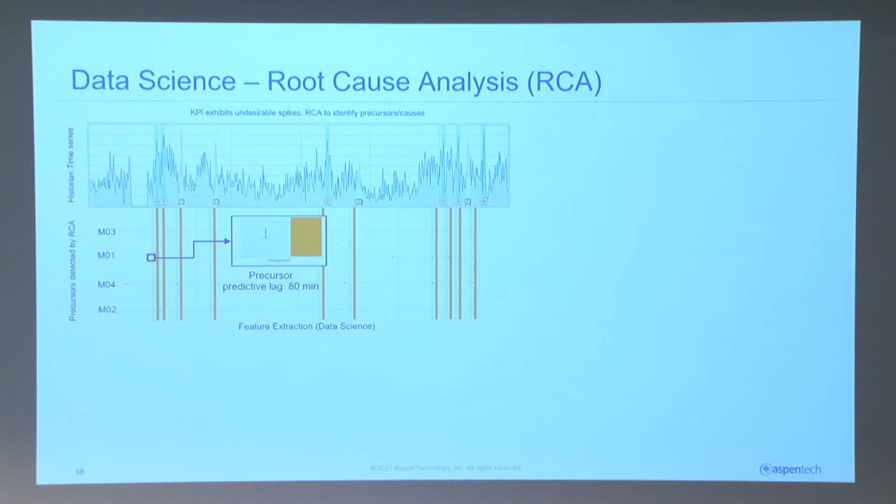What we do here instead is that the entire feature extraction is done by data science. So what you're looking at here, that bar represents in a way the event window, the time surrounding the event. And what we can find is that there are certain precursors just prior to that event. It uses Bayesian approaches to generate this causal map. This causal map has the y-axis as actually time. What you're looking at the bottom is actually the event - this is the event node. And you're seeing the links between all the precursor nodes and the event node. In this time domain, you can actually see small snippets of the time series at each node.

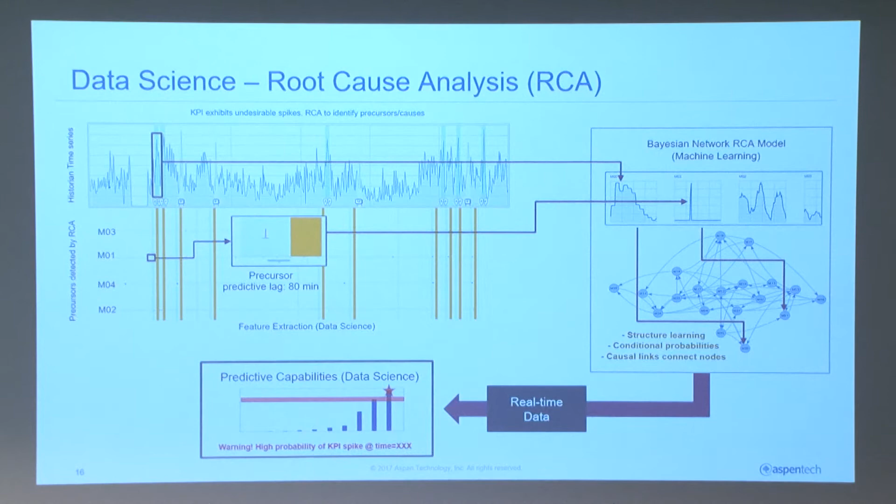Once you train this model using past historical events, you can then put it online, and when subjected to real-time data, it'll give you a sense of the high probability of a particular KPI spike. Now, this entire workflow, if conducted with typical Six Sigma approaches, might take weeks, may take months to conduct. This could be - I wouldn't say hours, but it could be hours, could be days - but it is a significant step beyond where we are today.

Again, what I would like to add here is not all techniques that we're talking about here - some, like PLS and PCA modeling, have been with us for a long while. The key is how do you blend such capabilities with the other capabilities you're just seeing. The latent variable modeling technology with regard to multivariate analysis is very powerful, enabling you to do data conditioning, anomaly detection, and determining the key contributions to a particular event.

And now, when you think about this, you realize that combining this with what I just spoke about in the root cause analysis domain could become even more powerful. Root cause analysis deals with the ratio of abnormal to normal events being very small - you have spikes occurring infrequently - while PCA-PLS analysis, the ratio of abnormal to normal would be relatively larger. So there is a gray area. There is a need to understand where one technique stops and the other one takes over. And so that's the challenge we're trying to address today.

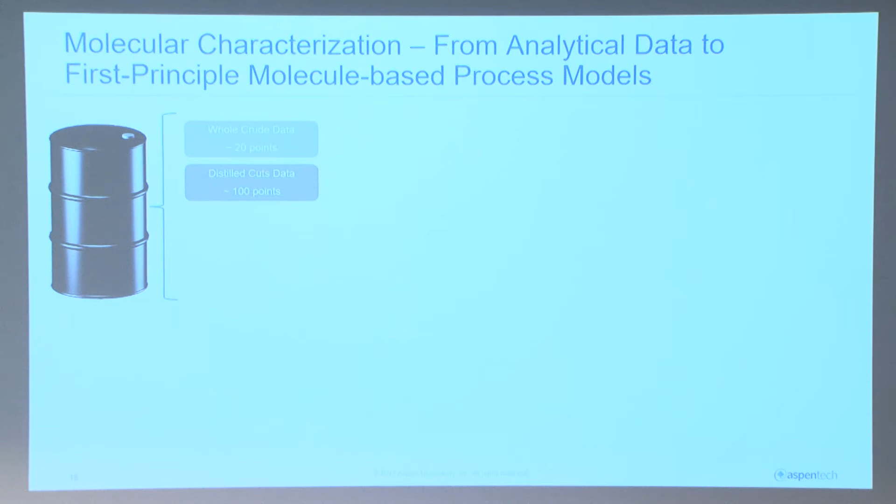Molecular characterization is something, again, when you think about the data you can get from crude oil - if you look at the crude data, it could be only 20 points of data for a crude, could increase to 100 points using distilled cuts. If you go on to GCs, you will get 1,000 points, and this is actually 50,000 - that's Fourier transforms using mass spectrometers. So you could get 50,000 points of data. Now, if you took those 50,000 points of data, we create a molecular characterization model, and that model helps us characterize the molecular distributions within the crude.

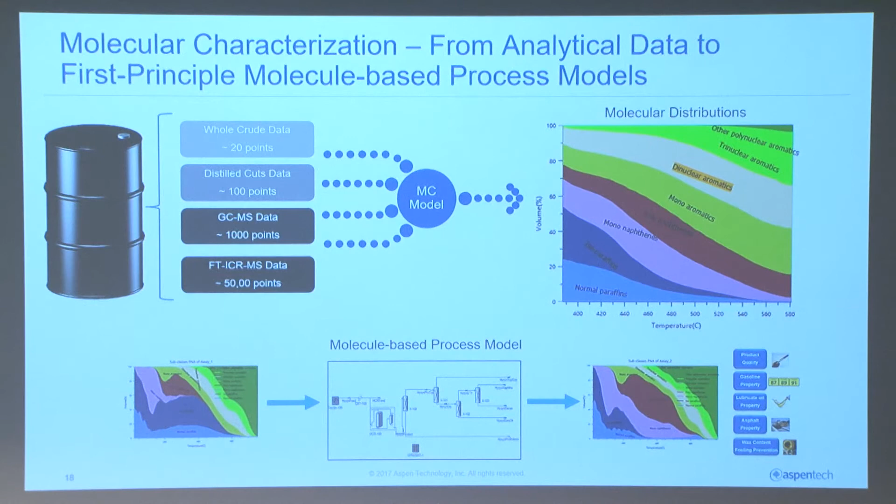Ability to do this implies that now we can create a much more fundamental understanding of the process itself. So you're looking at two regions here: one, we're coming at it from a data science perspective, the other from a molecular modeling perspective. And where do they intersect? They intersect in areas like these. This is an area which George may remember - he was the one when we initially presented these ideas to him. He kind of critiqued them, and I think he gave us a lot of insights into how to proceed here. This is combining data science, first principle and empirical modeling for equipment analytics. And what we have done here is specifically for distillation.

But the distillation example is just an example. This could be the way of the future in terms of how data science, machine learning, first principle modeling, and empirical modeling all come together. And it does in this particular case. This product...

...starts with an Aspen Plus model, enables you to connect it to real-time data. Again, all this has been done many times in the past. It's a key question that was previously asked earlier: how do we do this for the mass market? This is the kind of attempt for the mass market audience.

The entire tuning of the model using historical plant data is done automatically, the entire calibration process, the parameter estimation, all done pretty much in the background. And it ends with a view that an operator can use, which includes a detailed look at the stability diagram of the column, the internals in terms of liquid and vapor flow rates. And on the other hand, alerts as to when you could encounter flooding in this column.

The basis for all this is an ensemble model. It uses first principle models, it tries to create a pseudo-dynamic model using empirical techniques, and then there's pattern recognition involved as well to add from the raw data, and that all combined together gives you this view.

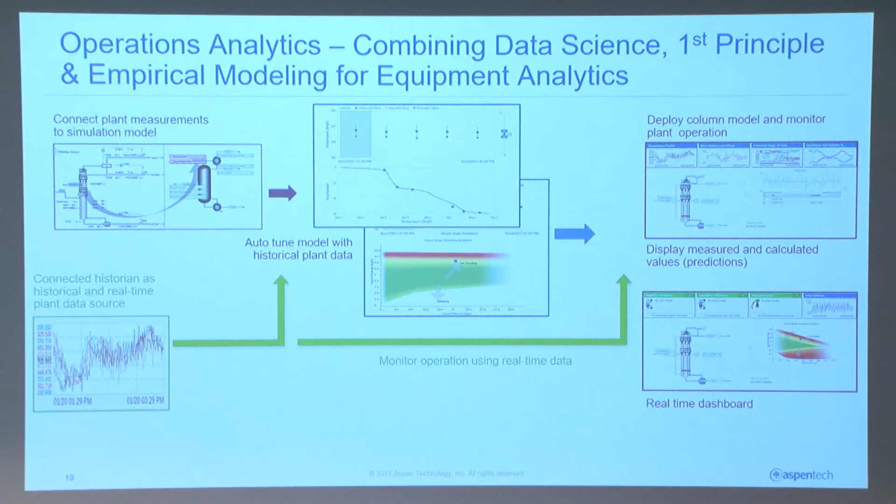Just to touch on the maintenance front, we have equivalent efforts. Here we're combining sensor data on one hand and asset work history on the other, two different data sources, creating smart trained agents that can assist in asset monitoring as well as failure prediction. In failure prediction, normally with operational issues you can give early warning of minutes and hours. In the mechanical maintenance space, you can give early warning that goes to weeks and months. And that's where we are right now.

Just want to give you a little bit of a picture. I picked a few of the areas where I believe there's a lot of work to be done. Cognitive computing...

Many people think of cognitive computing as the next level beyond descriptive, predictive, and prescriptive analytics, where natural language processing is used as a communication device to greatly improve our ability to interact with the analytics. Others see it as not needing to be another level of computing, but rather an addition to what we already do.

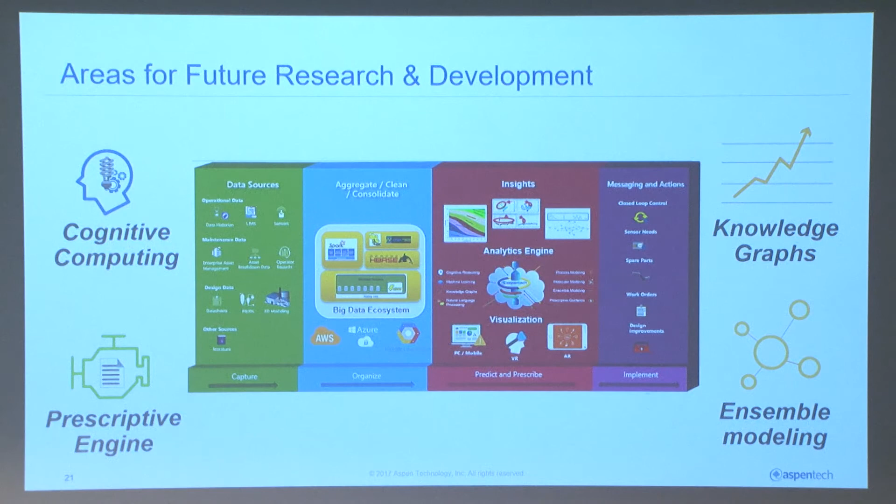Knowledge graphs are a capability that, since we have data from different domains—maintenance, operational, design—allow us to pull them together without replicating all the information. You need some way to draw those connections, and knowledge graphs may help there.

I've already spoken about ensemble modeling. We've begun that long journey of stacking models and using them where appropriate. I believe there's a lot of work to be done on the rules and workflows appropriate in each case. The prescriptive engine also needs a lot of work. We've begun providing prescriptions in many of our analytics, however the prescriptions are still contained and finite. They are not automatically deduced from the scenarios being exercised, so there's a lot more work in that regard.

Many of the answers are in the different views that I already showed you—we just need to work on those, and I believe others are working on it as well.

So where do we see this? We see that these capabilities empower the next generation of process engineers. What does it bring to the table that is new? Engineering, modeling, and optimization have definitely been the bedrock of a lot of the work done so far. Now we add in data science, machine learning, and analytics—together, not separately—and I think they make for a much more powerful set of tools.